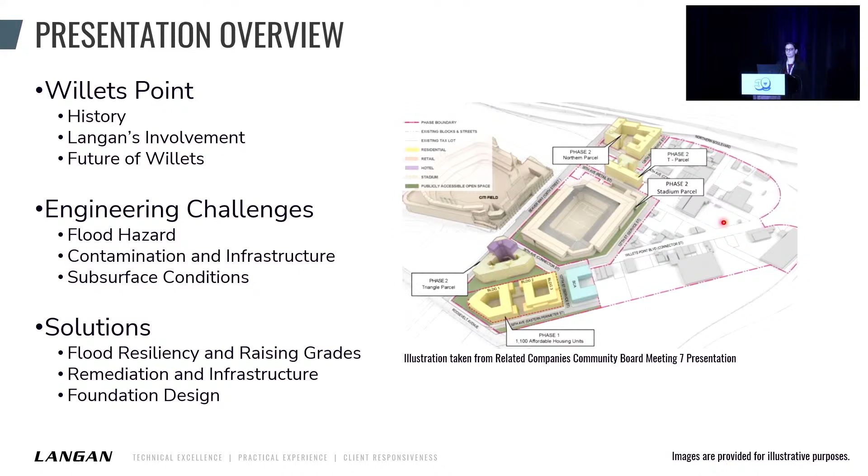It's 61 acres of land. To our north, we have LaGuardia Airport. To our south, we have Arthur Ashe and the Louis Armstrong Stadiums for tennis fans—that's where the US Open is held. To the west, we have Citi Field, home to the New York Mets. Congrats to all the Dodgers fans for your win, but go Yankees.

We also have some sensitive transportation infrastructure near us. We have a DOT elevated highway to our north, a New York City Transit elevated line to our south, as well as a DOT bridge to our south.

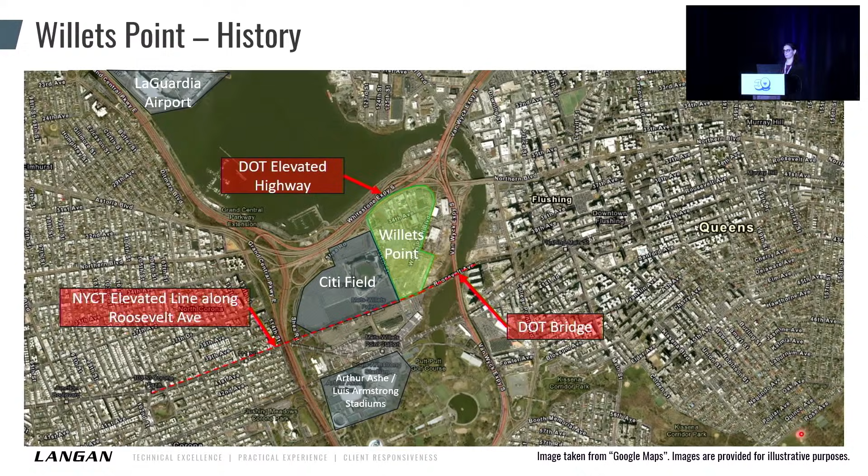So the history of Willets is very important. In the 1900s, the New York City area was using coal to heat their homes and for industrial purposes, and they were taking that ash and just dumping it at Willets. Then in the 1930s, the area became a little more urbanized, and they decided not to put residential housing there because of the coal ash. Instead, they put in some auto body shops, some filling stations, and called it at that.

So it was like that until very recently—you would just walk by and see all these auto body shops. In the late 2000s, early 2010s, there was an initiative by the governor and mayor to give Willets a facelift. And so that's when we came on board.

So we came on board in the 2010s, but it wasn't until a decade later that we got boots on the ground. I did the initial geotech investigation in 2019. That's because this is 61 acres of pretty contaminated land, and I'll talk to you about the other challenges as well. We had to get developers, contractors, community boards, and government officials—a whole bunch of people—on board for us to even get to the site.

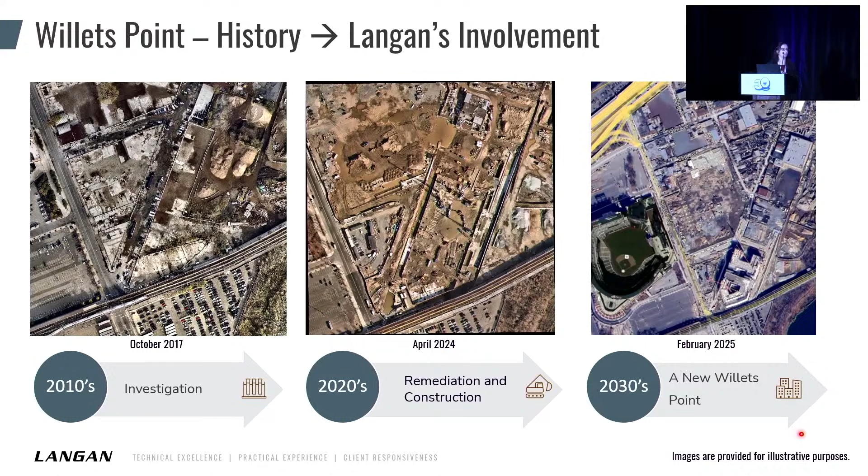So in the 2020s, we did remedial work and started construction, and we're hoping for the next decade to show a new Willets in phases 1 and 2, with a start to phase 3.

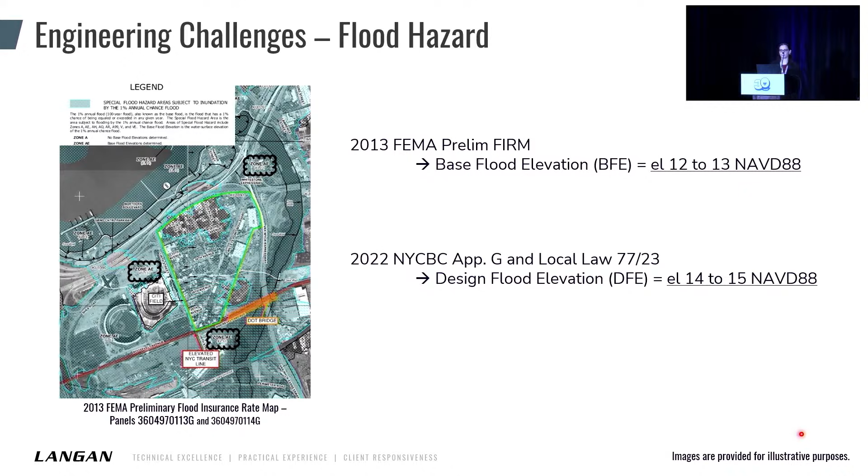So the challenges. This is 61 acres of land that's within a flood zone. If you go to the FEMA maps and find our site, it's telling us we have to go to elevation 12 to 13 for flood resiliency. That's already above existing grades. We also have to look at the New York City Building Code, which requires an additional 2 feet of freeboard. So that's 2 more feet of fill needed for flood resiliency. That's 61 acres of land that has to go up.

Next, obviously, all the contamination. There wasn't much oversight in the 30s about what you could do, so these auto body shops were just dumping oil, gas, tanks, car parts, bowling balls, you name it, below the ground. We had to remediate all that soil. Also, the infrastructure wasn't built for residential use. It's not going to meet the demand we want for our future vision of Willets, and whatever is there is outdated, very inadequate, and decaying.

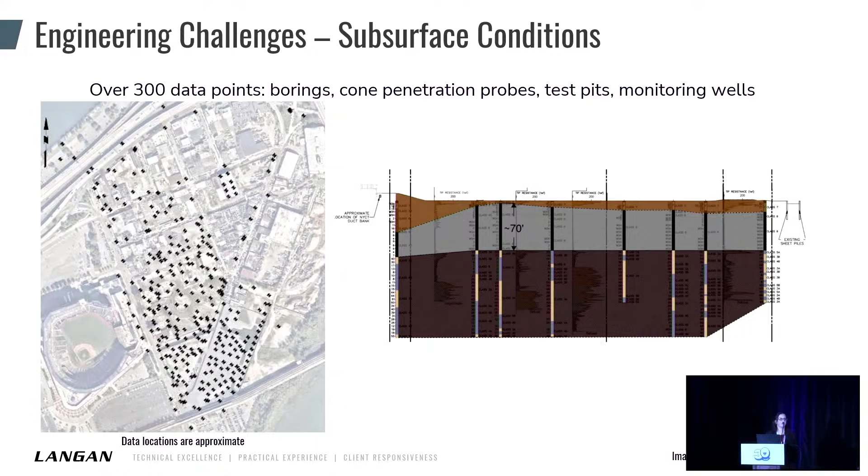And finally, the geotech aspect. We have 300 data points in this area, and we can see variation from the north to the south of the site. The southern half is really where the bulk of our work is at the moment, and it's the biggest concern because there's 60 to 80 feet of underconsolidated, super soft, soup-like clay, as well as silt and peat. So who would want to develop on this kind of ground?

If you walked around the site a few years ago, you could see a pile-supported footing and all the ground around it settling. If we did a test pit—this is a picture of mine from 2019—the settlement of the roads and sidewalks was handled by just going in and putting more asphalt, and that's more weight, so that's more settlement. Then they'd come back with more weight and more settlement—a never-ending loop.

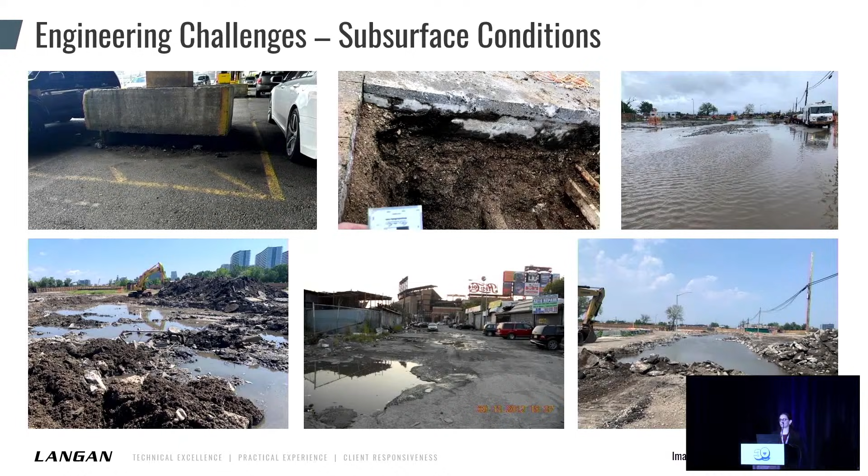And the site itself was a flood zone without flood. During a normal rainstorm event, there were just puddles and inches of rain on the site because the clay wasn't allowing it to drain. There was no infrastructure, no stormwater management, and it was just a mess at the site.

So the solutions. First and foremost, we have to make sure the site is flood resilient for the future, so we have to bring the grades up a minimum of 2 to 9 feet, and that's on top of all this clay that I was mentioning.

We also have to worry about all the edge conditions because we're making this new neighborhood, but we still have a whole other part of Flushing around us. So while we're putting our own streets, infrastructure, buildings, and neighborhood, we have to make sure everyone can access it. Even though we're putting in roads, we have to make sure our roads attach to the roads that exist. In some cases, that means we have to add 10 to 16 feet of fill just to be able to access the site.

So while contamination and infrastructure seem like environmental and civil issues, they become a geotechnical problem when you actually have to go in and do the work. We installed and designed support of excavation systems for all this work, which could go up to depths of 20 feet below grade, in high groundwater and very soft soils. So you see the challenge in that.

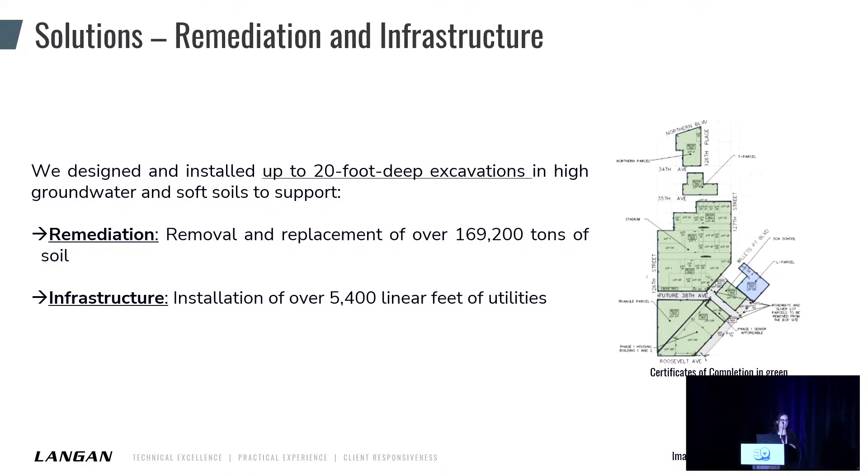So when we actually went in and did this, we were able to remediate and replace 169,200 tons of contaminated soil, and our civil team was able to help with the installation of 5,400 linear feet of utilities. And this is only to date, for phases 1 and 2. Phase 3 has not begun, so this number is only going to grow.

And here is what I've spent a lot of my career on, the foundation design at Willets. So we had a kind of checklist of everything that we wanted to hit while we were picking our solution for a foundation system.

We really, really wanted to do soil improvement. We wanted to be innovative, and it just didn't work for our schedule. It didn't work with the agencies. The cost was not where we wanted it to be. We went granular, did a few iterations, and it still wasn't where we wanted it to be.

So we had to look at piles because obviously you're not putting shallow foundations on this soil. Piles to rock would have been ideal, but rock is over 300 feet down, so you don't want 61 acres on stilts. Next, we looked at driven piles.

The cost of steel has gone up in recent years, so that was not so great. In terms of schedule, driven piles are typically faster to install, but we have to go really deep to hit bearing material, so that means you have to splice the piles, and that adds time, so it's not helping our schedule. And for agencies, I don't know how it is out west, but in New York City, they're pretty strict about vibration limits. So we couldn't drive any piles near the DOT to the north and south, and New York City Transit. It was a mess, so we just wanted to avoid that.

And then we were like, okay, drilled piles, let's do it. Concrete's a little bit cheaper, we'll make it work. So we looked at CFA because it's a really good option, but it's gonna create spoils, and we don't want to do any more remedial work than we have to. Hopefully those spoils weren't contaminated, but you still had to do in situ testing, and it was gonna add time to the schedule.

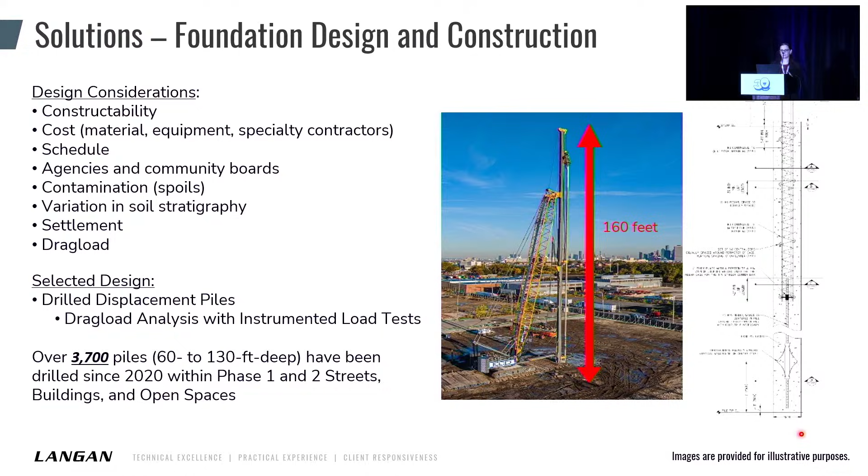So to date, we have installed 3,700 piles within phases 1 and 2, and this encompasses everything I mentioned. For the buildings, pretty easy - pile caps, piles. Everything else that has to be raised up to flood elevation was pile supported. So we went in, remediated, put our piles, put a platform, and on top of this platform we put clean fill. Within the clean fill is the utilities - I'll highlight some that we had to install. Then we went up to design flood elevation, and then we put roadways, landscape, hardscape, made it beautiful, right?

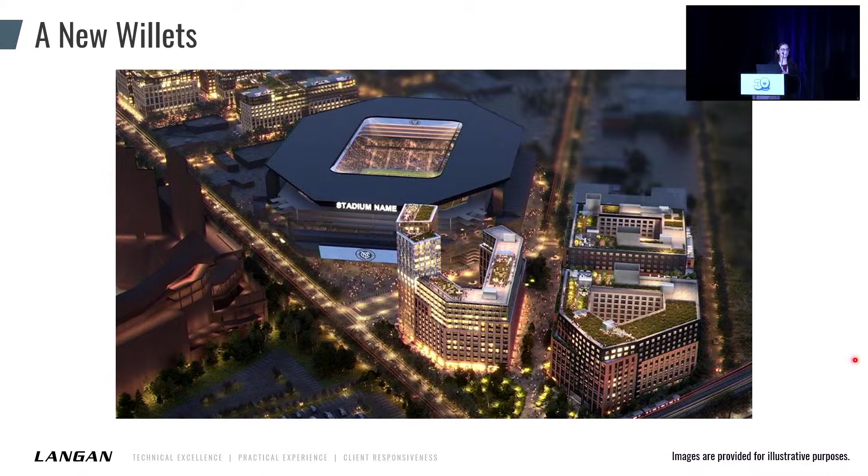So this is what we envision it to be by the 2030s. I've been on this project since 2019, since the second week I started at Langan, and it was a challenge. It still is a challenge, but it's really exciting, and I can't wait to see just what the future holds at Willets. Thanks.

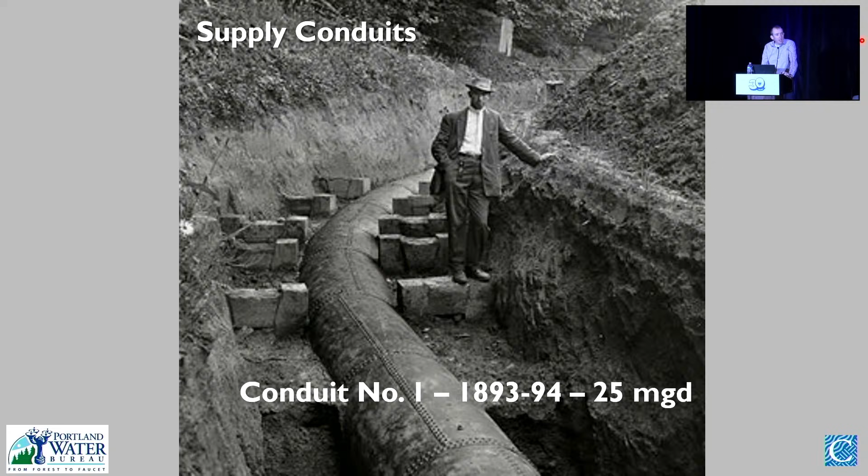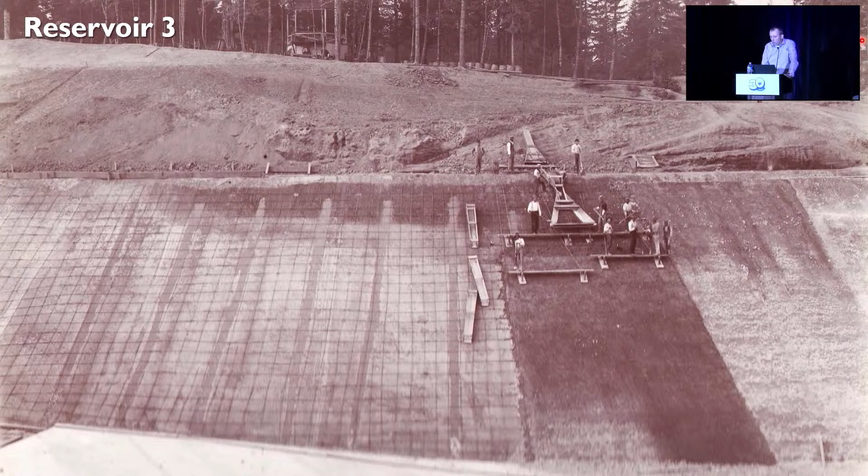Now here we have a photo of Reservoir 3 prior to first filling, looking here from the north towards Dam 3. You can see on the right of that photo there's a feature that wasn't in the original design drawings. As we dug back into the documentation for the project a bit, we found that they had recorded some significant cracking in the concrete liner shortly after it was first constructed there.

They had encountered some fairly rocky material when they excavated through that portion of the hillside, and also quite a bit of water borne on that rocky debris. They interpreted this to be a local stability issue. They put back this concrete buttress and also dug a little drainage tunnel through the hillside, patched everything back up, and then were ready to fill the reservoirs.

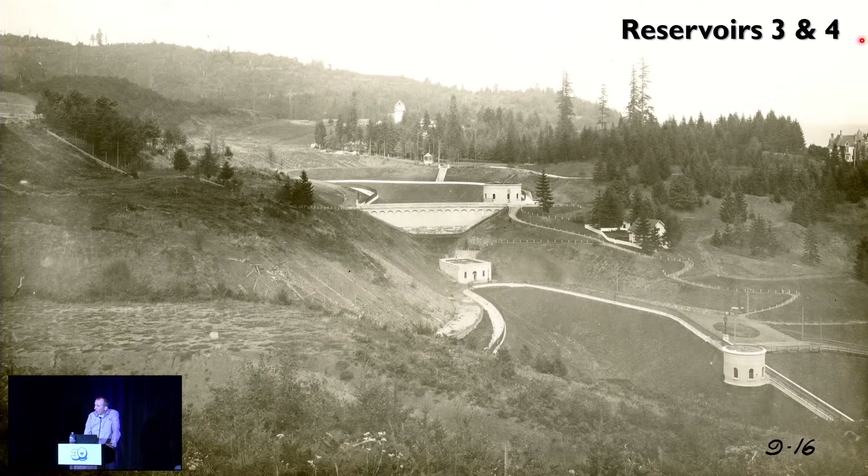So this is a photograph of what that would have looked like around the time of first filling. We're looking from the south now, so Reservoir 3 is the upper reservoir in the distant part of the photo, and Reservoir 4 is down near the bottom of the photo.

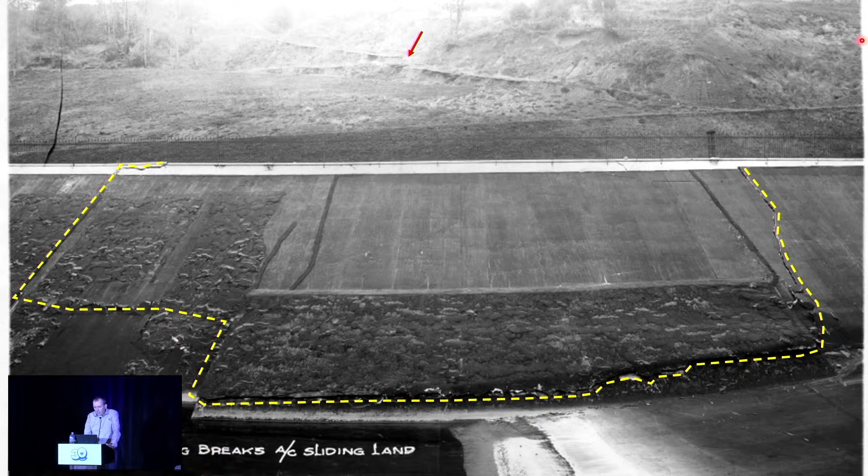Now the city engineers realized they had a slope stability issue, but they were a bit puzzled because they were anticipating more of a circular type of failure surface. So they were scouring the hillside in the roadway up above, looking for ground cracks to show where the headscarp was, and they couldn't find any.

They were puzzled for a couple of weeks until they got a communication from the cable car company, which had tracks about 800 feet up the hill, saying, hey, our tracks are coming out of alignment, do you know anything about this? And then they realized they had a much larger issue on their hands.

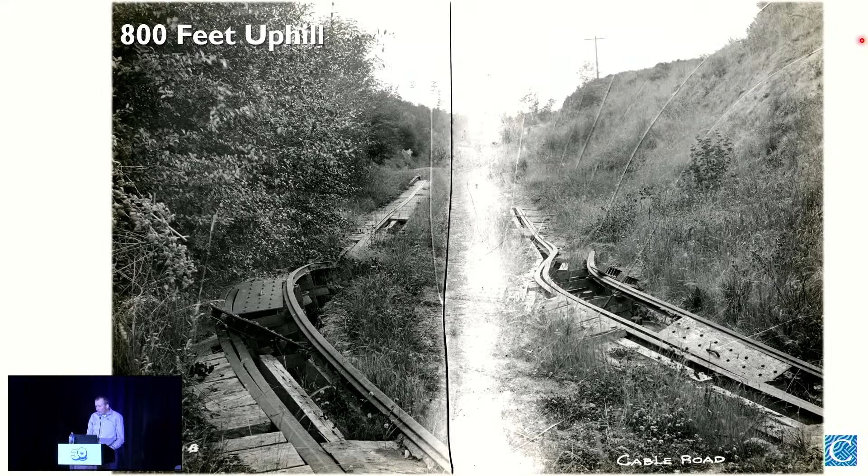That kicked off a round of much more detailed investigations and characterizations of the slide. We're fortunate because the city engineer recorded a lot of detail from these investigations in a paper presented to the American Society of Civil Engineers back in 1904. This was like a 50-page paper, so we have a tremendous amount of detail on what they were finding. I'm going to walk you through a little of their initial investigations and borrow a few images from their paper.

So we didn't have any measurements of movement downhole, but they were at least able to determine the depth of the slide movement. What they found is that the slide was about 1,700 feet long, about 1,100 feet wide at the base, 250 to 300 feet in elevation difference from the toe to the head, and anywhere from 60 to 130 feet deep.

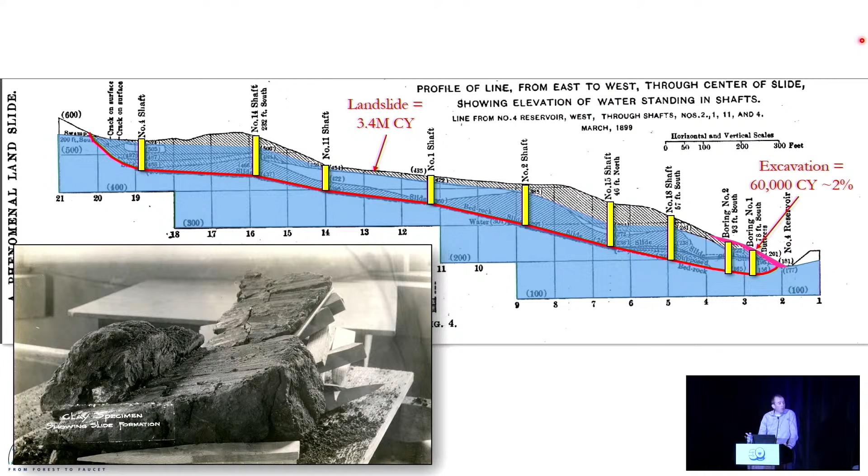So what tools did they have at their disposal back then? Not very many. They can't remove that clay, and they don't have a lot of structural options to stabilize this, but they could deal with the water. So they came up with the concept of constructing tunnels to reduce that rate of movement, which was about 15 inches per year at that point, placing tunnels along the shear plane to gravity drain that water from the top of the slide out through the toe.

Between 1900 and 1906, they put in over a mile of these tunnels, and they were actually very successful at reducing the rates of movement, with that rate being a little over 1/8 of an inch a year by the time we were getting towards construction of this project.

To put a little more detail on those rates, we don't really know how fast that slide was moving at the time it initially reaccelerated. But by the time they started to investigate over the next couple of years, it was moving about 15 inches a year. They started dewatering for these shafts, and it knocked that down by 90% — a big eye-opener to them.

They stopped dewatering, that rate started to rebound, and then they started putting in these tunnels over a couple of phases, which brought the rate down to about half an inch per year. Over time, that rate gradually decreased as the drainage became more effective, and we start to see a change in the weight balance between the head and toe of the slide as it keeps moving.

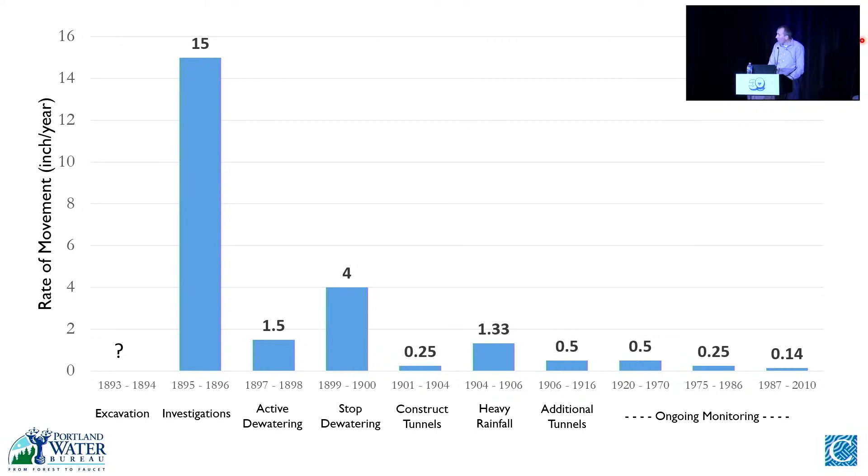Really, this was remarkable mitigation for them at the time, to be able to change the rates like that. But 1/8 of an inch a year still adds up over time, so the Water Bureau, over the following decades, still had a lot of damage to their concrete and other facilities to continue addressing. They eventually lined the reservoirs with a Hypalon liner to try to reduce how often they had to touch up the concrete.

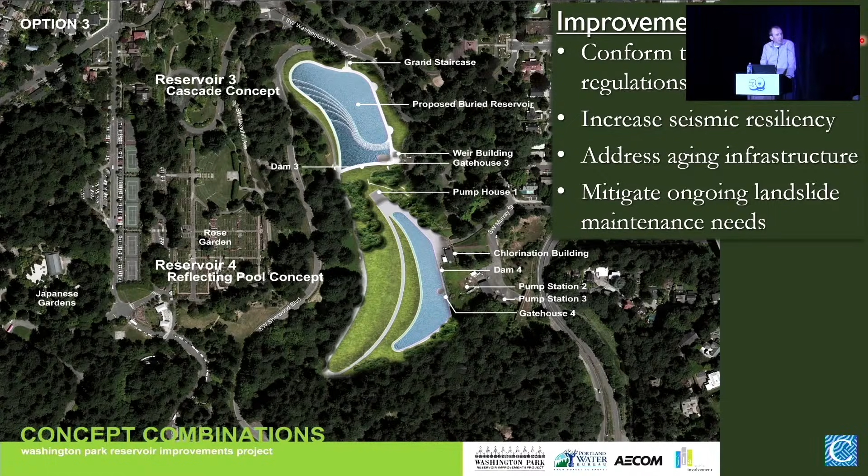But eventually they were getting to a point where they knew they had aging infrastructure they had to address. As they kept going, they also realized they had more seismic resiliency issues that needed addressing, and eventually they would have to respond to federal requirements to cover their drinking water supply. So that's where this project began, in order to improve the existing reservoirs at the Washington Park area.

And all of this had to happen within the footprint of this active landslide. So how do we do this without repeating the same mistake that they did originally by cutting indiscriminately into the toe of a slide?

Well, we had some things working in our favor this time as we approached the landslide design, and one is we have a tremendous amount of monitoring data. So we have the survey data that goes back to the 1800s that tells us how that slide was behaving over time and the effectiveness of that drainage.

But we also have slope inclinometer data. It goes back to the 80s, and not just at the site, but all the way up the hill as well throughout that landslide. And you can see from this plot I'm showing you here for one of the SIs that behavior has been remarkably consistent over time.

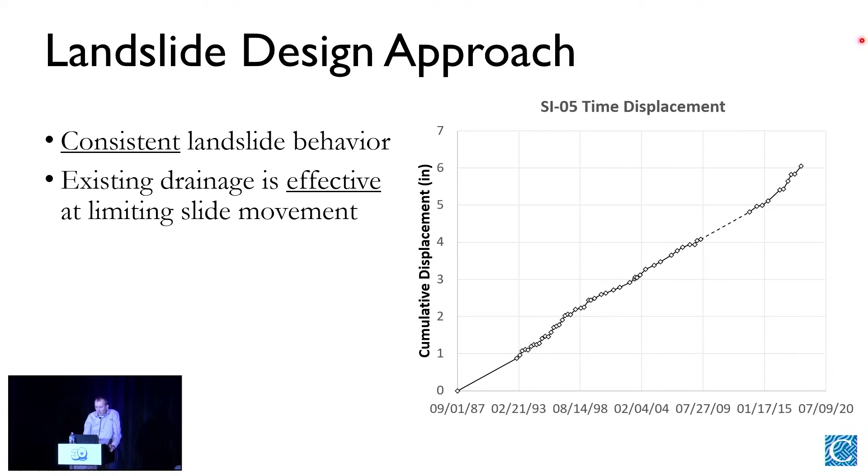So that allows us to accommodate this movement rather than trying to stabilize the slide. And in order to do that, we can isolate the new reservoir from the landslide. So the way that we did that for this project was by designing a compressible inclusion to place between the landslide and the reservoir.

This compressible inclusion consists of a zone of engineered expanded polystyrene, or EPS, that gets placed between the slide and the tank. And as that slide moves, it's going to crush that EPS and impart a much smaller and more predictable load on the tank. And then we also have an MSE fill that goes in between the slide and the reservoir for a couple of reasons.

One is we needed a place to build some of those visual features, but it also helps put some weight on the toe to counteract the removal of water. Now that we no longer have an open reservoir there, we've actually taken some weight off of the toe of the slide by removing that water.

And then there's a little concrete toe block you'll notice there. The purpose of that is to get us up a little bit to start that MSE wall, so we don't have to cut back so much into the toe in order to get our base width for the MSE wall.

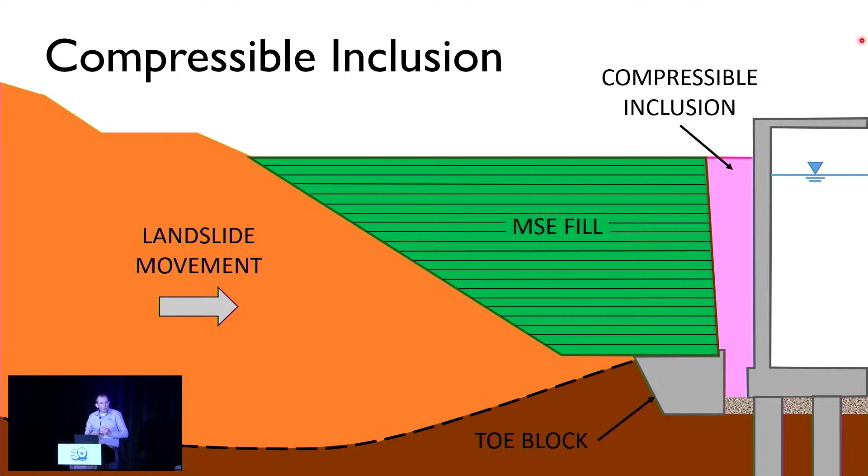So this is a picture of what that looks like. Engineered EPS is going in just as blocks that are trimmed to be flush with the MSE wall on your left and the tank on your right.

And all of this, of course, fits within a much larger project that included shoring that allowed us to offset the reservoir from the existing toe of the slide a bit. We have a lot of drilled shaft foundations that were supporting that new tank, visual feature elements, and park elements on top. But really the key part of that landslide design was the compressible inclusion.

So let's talk a little bit about how the landslide responded during construction. This was a project that lent itself very well to the observational method, and we used some specific techniques to try to manage those risks of having to make some excavation to the toe during construction.

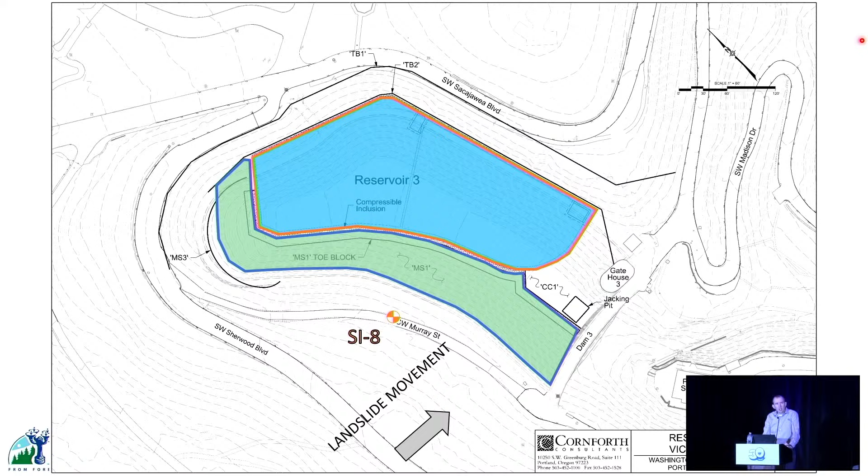So we'll look today just at a small section here of the MSE wall construction. That's the green area I've shaded there, and we're going to look at a particular inclinometer, SI8 here. This is an inclinometer that was installed with an IPI string, so we were getting very frequent readings of how the landslide was responding to the changes we were making at the toe.

So I'm going to show you a series of photographs here on the left that illustrate the progression of construction, and then on the right we'll look at how the slide is responding to that using that inclinometer.

So we have kind of a base rate of movement going in, and the reservoir is dewatered at this time, and so that rate's actually just a little bit higher than the pre-existing rate because we've taken a little bit of weight off the toe there.

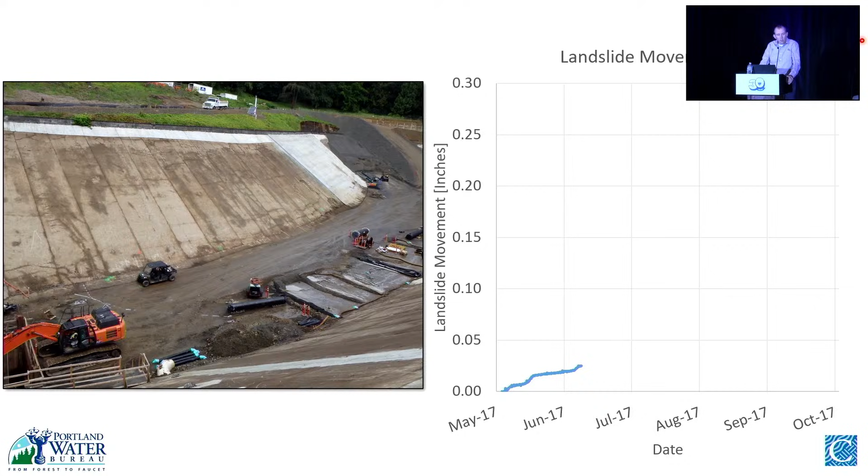And the first thing the contractor was allowed to do was to get in, and they could strip the concrete liner and excavate for that toe block over just 50 feet of the reservoir. So we're using these closely sequenced excavation methods with a required backfill before they can progress to a new segment, in order to manage how much weight we're taking off the toe of the slide at any given time.

So this wasn't very much. This was 6 inches of concrete liner, 100 cubic yards of material at the toe for a 3.4 million cubic yard landslide. But do you think it felt that? It did.

At least the lower block of the slide did respond, because we're changing the stress conditions at the toe. We saw an immediate response where that lower block accelerated, and then the contractor had to put back concrete in that hole within 24 hours, and you see it immediately starting to slow back down. We progressed with that sequence in 50-foot segments, moving from south to north, and with each segment we saw a similar response: initial acceleration, then deceleration as they backfilled. This was telling us that the slide is responding in a manner consistent with our geologic model.

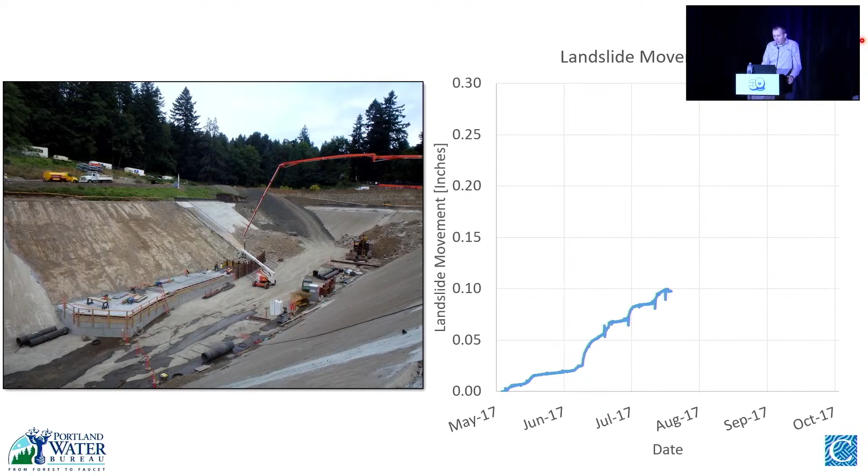After we got that toe block complete, we needed to make a bit of a cut into the hill to get that MSE wall keyed in. So there's a little bit more excavation, probably 400 to 500 cubic yards. We put some of that material on the slope to the north of it, so it's not off the toe entirely, just in a different place. But as you'd expect, more weight changing means more response.

We're zoomed in on this, with a pretty tight scale on the vertical axis, looking at just a quarter inch of movement or so, but it's definitely responding. Over time we kept building the MSE wall back as we expanded that excavation footprint, and we were kind of chasing ourselves for a while because you had to get a fair length of wall exposed to build up some height. That movement continued to progress for a couple of months as we caught up with the weight there.

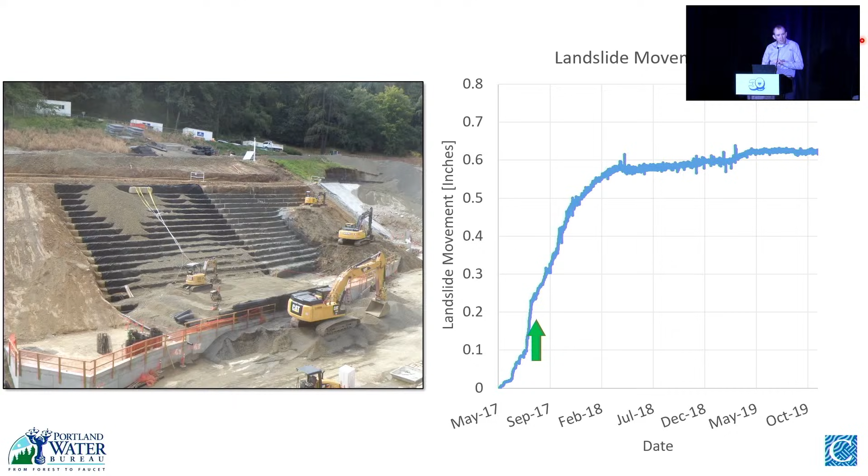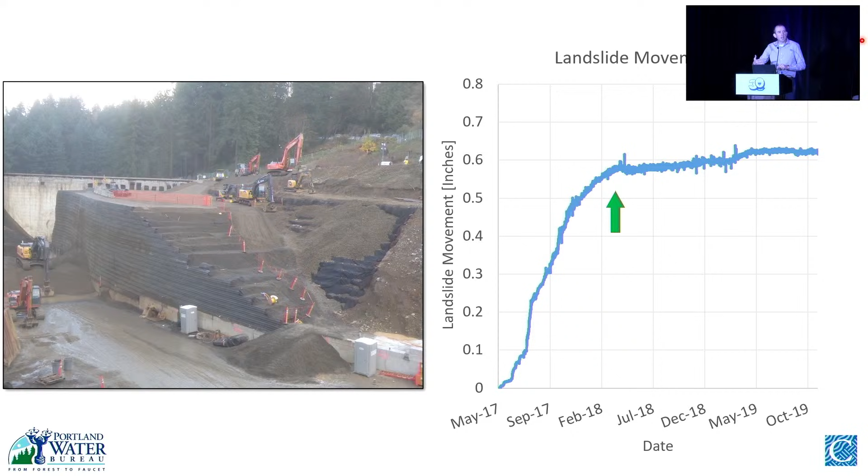I'll zoom out this plot of slide movement rates now, and the green arrow shows where we're at in that sequence, and we'll walk through the rest of the MSE wall construction. You can see we're starting to get about halfway up over a limited length. Now we've got that about halfway up over most of the landslide toe in this area, and we can see the rate's just starting to slow a bit. Finally we get that MSE up to design height over about two-thirds of its length, and we finally caught up with the amount of weight we'd removed, and that slide is starting to stabilize.

While I'm not going to get into a lot of detail on how we were using this information for construction decisions today, we did have a framework in which we were monitoring each of these events as it went, assessing them within a risk framework with different tolerable thresholds in order to make decisions on how construction could progress.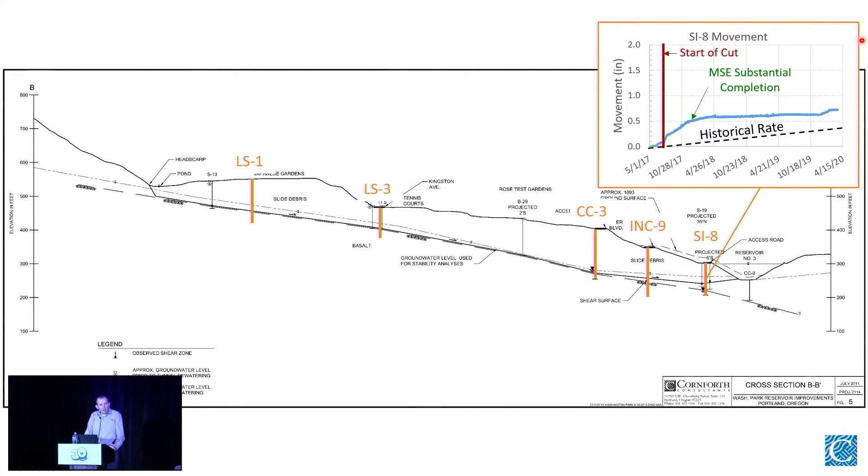If you look at the next instrument up the hill, you can see we had a response that's very similar in overall trends, with initial acceleration followed by deceleration, but there was a delay in when that occurred and the changes were more gradual. That continued to hold as you moved further up the hill, where we had an increasing delay in movements, and in general the changes were more subtle as you went up the hill.

This is consistent with a lot of behavior we'd see for an extensional translational landslide, where the slide is extending from the toe as that support is removed. At the start of construction, we would have had varying degrees of internal tension cracks existing within that slide, and you end up seeing different blocks that tend to move within the slide. So you make that cut at the toe, and the lower block responds right away. Then in the process of doing that, it reduces the stability on the block uphill from there, creating what you might call this train car effect, where it moves in these blocks progressing up the hill.

And because we're doing this in a way that's removing support unevenly at the bottom, we have different levels of stress redistribution happening. It tends to diffuse the suddenness of that response as you move up the hill.

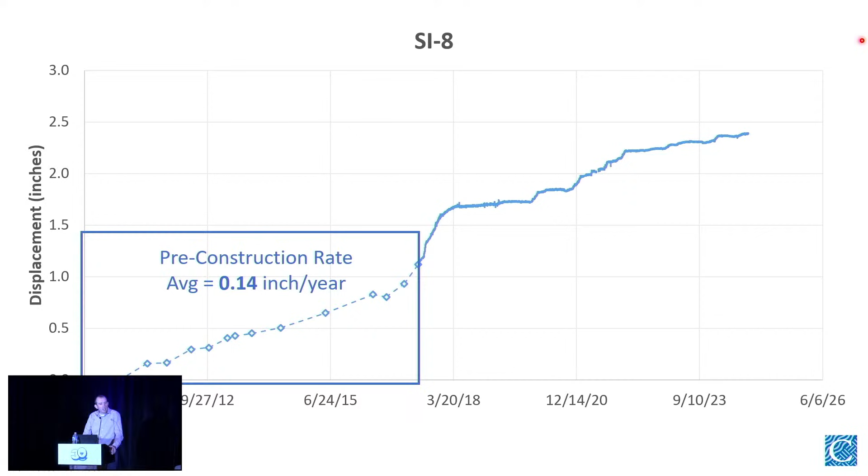I also wanted to show you a bit about what it's been doing since construction. So we talked about how prior to construction we were looking at a little over 1/8 of an inch a year of movement. During construction we peaked out at about 0.86 inches per year, and that was a total of just under 2 inches of movement over about 4.5 years. So we saw about 14 years worth of movement in 4.5 years. We consider that to be certainly an acceleration, but a manageable change in rate.

And since that time, we've been averaging just under 1/10 of an inch a year. Now, I don't know if it's going to remain below that pre-construction average indefinitely. We've increased the factor of safety only very slightly over the pre-existing conditions, and that really wasn't the intent of design to reduce the rates. It was really to accommodate the rates. So what's encouraging to us is that we're seeing rates remaining within that range that we anticipated during design.

So those are the thoughts I wanted to leave you with today. We were very fortunate to have the level of monitoring data that we did for this site, and we were really able to leverage that in order to design for this slide in a way that we were able to accommodate movements and manage construction risks associated with this approach, rather than trying to stabilize it. So again, data is always our friend as engineers, and the more we can leverage that, the better. So far, the post-construction data is indicating that landslide movements are within the design range.

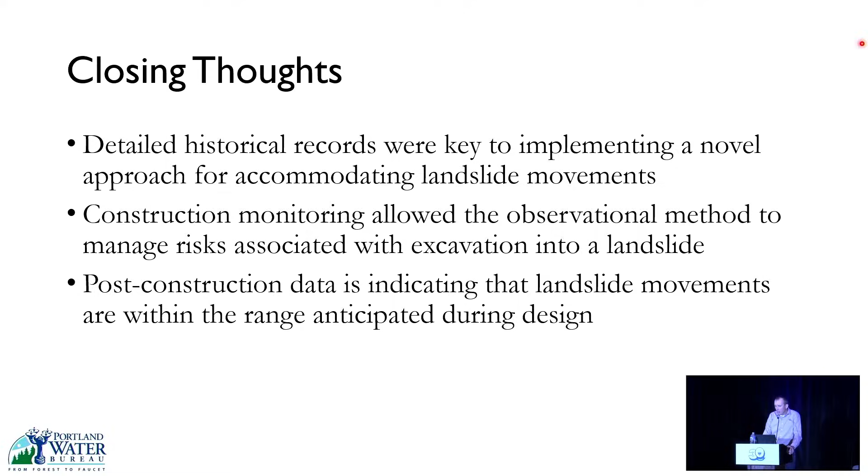But we're happy that we have the seismically resilient water supply now, and all indications are that the landslide mitigation system will be able to maintain this for a long time to come. So thank you. I understand that we're going to save questions for the end, so I'll stick around after this if anyone wants to talk with me. Thanks.

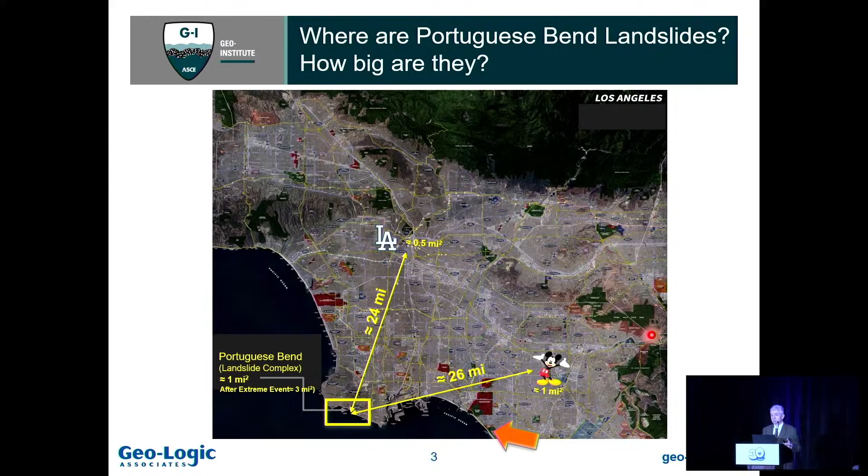You see the orange arrow at the bottom of this slide. This is approximately where a beach close to my house is, so I'll show you how it looks. So this is how it looks. I go to the beach 3 times a week. I never can stop thinking about this landslide because this is how it looks, and let me annotate it a little bit. So this is Portuguese Bend, this is the original, this is the best known.

This is about 1 mile, and this, what we now call Altamira complex, which started moving in October 2023, is 3 square miles. What I've also shown here is indicated as VVG, which is Valley View Graben.

This is what our geologists think: water is coming in from a higher elevation and then ends up at the toe. Notice also how this is relatively flat. This is not kind of steep slopes. They are relatively flat slopes, but they move, and they do move pretty well.

A few highlights about this landslide. It used to be the largest landslide in the US. It allegedly started moving in 1956.

Portuguese Bend landslide failure plane was, at least everybody or most people thought, 150 feet deep, moved about 12 feet a year or half an inch a day. So relatively fast. And then it started moving seriously.

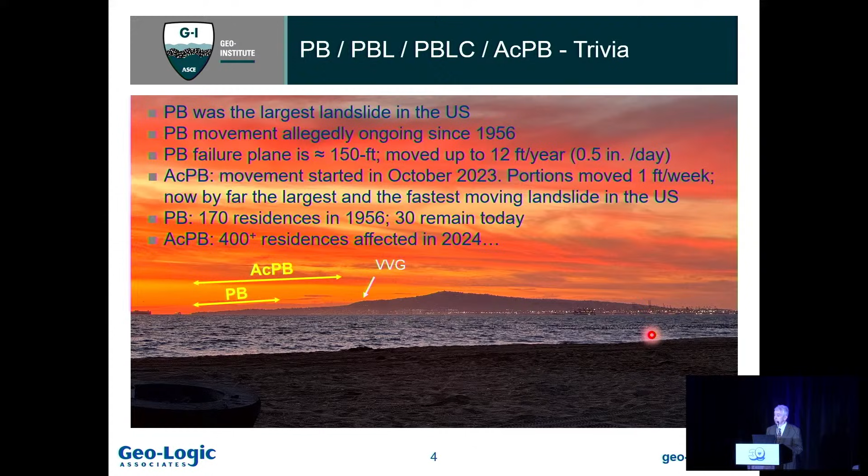Now, this is how residences within the Portuguese Bend landslide, those 30 that remained, look like. You can see people kept fixing. They refused to move, and they kept lifting them up and up and up. Those of you who took a field tour last Saturday, you've seen this, what we call a ski jump, which goes up and down. Well, this is that ski jump, just up the hill, which is now not accessible for various reasons.

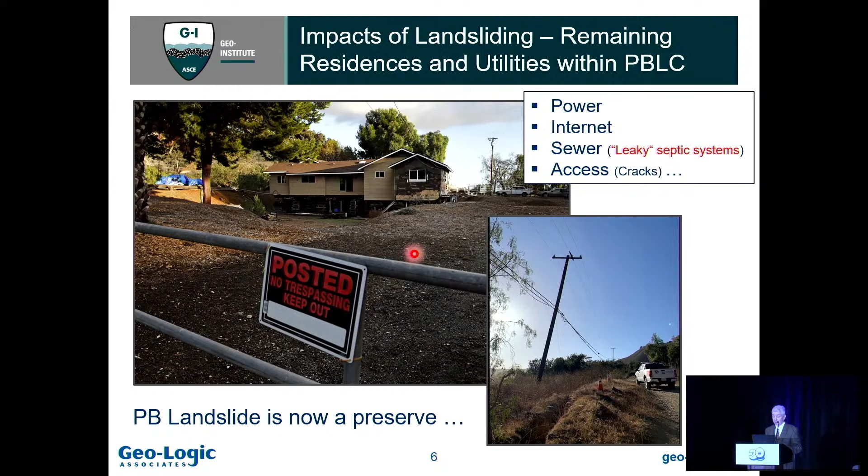It is now a preserve, so there's no new development. It's a nice hiking trail, unfortunately not accessible, but hopefully one day it will be.

So in summary, this is what we found when we joined this project: 70 years of investigation since 1956, and 476 geology and geotechnical reports. I had a staff engineer look at all of them with one question - find me one that does not end with 'we need more data.' He actually did find one.

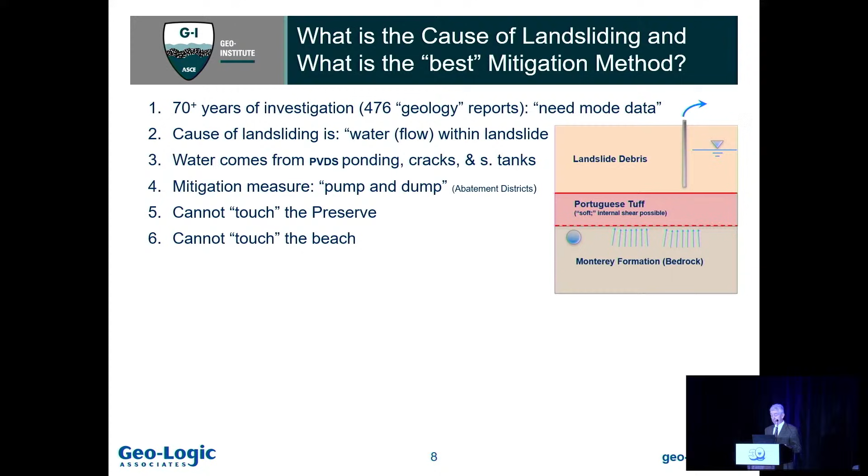So then we said there is enough data - 476 reports. I don't recall when I had this much information in my career. The predominant cause of the landslide is likely artesian pressure at the toe. The most likely source of this artesian pressure is the Valley View graben, which I showed you on one of the first slides - something big in the middle of the hill.

Mitigation measures release the artesian pressure, but it's absolutely paramount that you also do source control, because you may release it, but the next season it will build up again, and your vertical wells may get sheared off.

We also said we can avoid disrupting the preserve and the bugs and bunnies and whatever they eat, and we can do that by directional drilling, but we will need access to the beach.

In this business, opinions differ, and over 70 years people have developed certain ways of thinking. Some convincing is needed - what I showed you on the previous slide can be a technical proposal, but some work with the public and others is also needed.

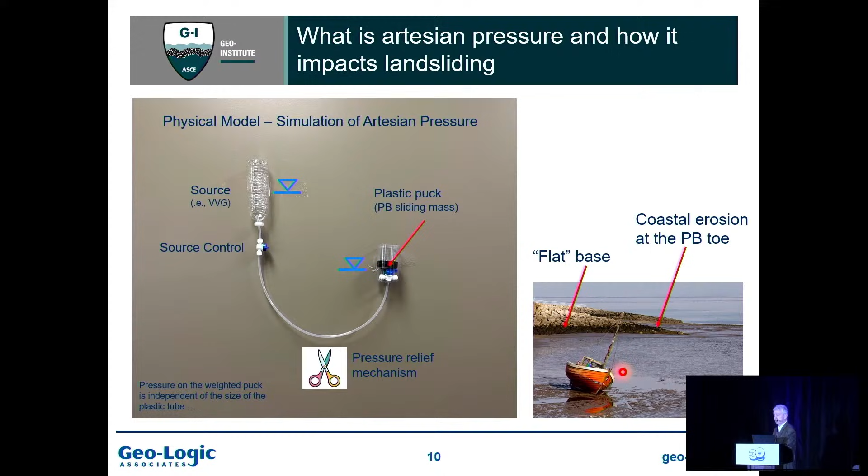With that, you can develop a conceptual model, which we did, and this is a conceptual model just for this part of this large landslide complex called Portuguese Bend. So here's the conceptual remedial measures in conceptual form. Within the red line, there is the landslide.

So what I would do first, I would cut the source control. If I have a magic wand, I would cut a deep trench so water cannot come in and cannot feed the artesian pressure at the toe, and then I could drill and release it, and hopefully we are done. But that is not feasible.

So the other way to do it is to install a series of horizontal or directionally drilled wells here at the toe, access permitting, and then hopefully intercept as much as you can, and then work at the source, which is above, unfortunately in another city, with a few agencies involved. Those of you who practice in Southern California know how easy or difficult it is to put all of this together. But in concept, that's it.

And once you control the source, then you can come at the toe and poke a few holes by directional drilling. We call them hydroaugers. It's the same technology used in fracking—just no fracking, but a mistake I made once was mentioning fracking, and that generated two weeks of discussion. These can be up to 1,400 feet long.

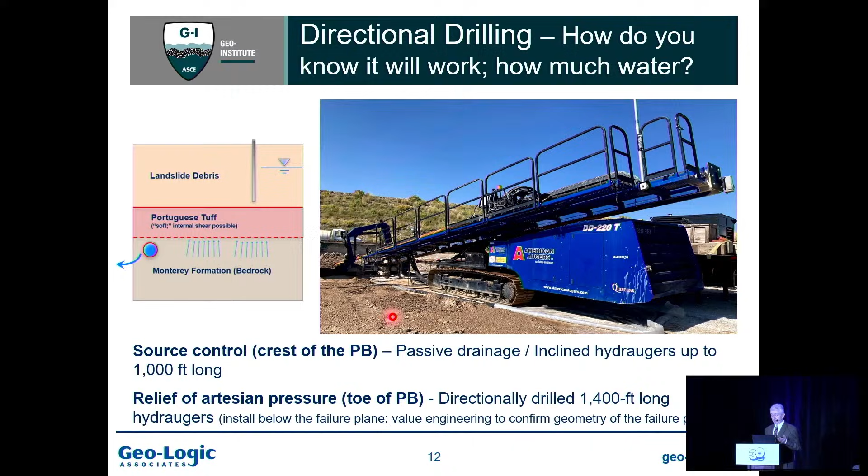Now, some convincing is needed here, because people don't see much of this, especially in Southern California. Saying yes, we did it at the FRB landfill, and we did it at Sunshine Canyon landfill, isn't good enough. So you need to do some modeling. People like modeling—whatever the computer program spits out, that must be good.

Mr. Withoff, who is here in the audience, developed a square mile finite element model, steady state seepage, with artesian pressure at the base. We also developed, as I'll show you later, limit equilibrium models of the same area, with artesian pressure included and hydroaugers at the top of the landslide included.

We did a few, following the proper process: develop the model, back analysis, model calibration, model validation. We knew how much it moves, so we could do pretty well on validation and calibration. And then we did forward analysis with and without drains.

I will show you results here only for this, what's called the 1 and 1 for two blocks—basically the southeast part of the landslide—because the proper way to do this is not to experiment on a scale of 1 square mile, but to do a pilot program, value engineering, proof of concept, and so on, which comes with this type of modeling.

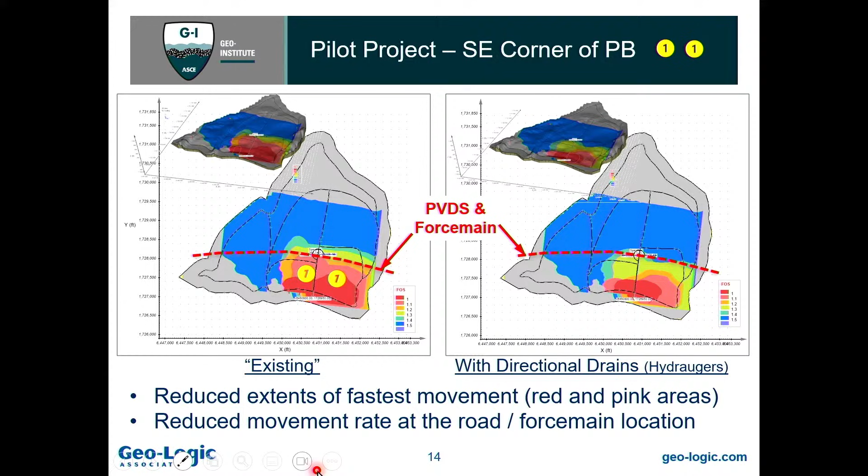Okay, so after all of this, you go into remedial design. It's a pilot project, and we also wanted to use value engineering because there are issues—even though there are 476 reports and about 1,500 boreholes, the geometry of the failure plane is not well known.

It's still a guess. With this directional drilling, you want to go below the Portuguese tuff, and for that, what you do is poke a few holes and instrument those holes, so you have a pretty good idea about the geometry, and then you can go below that and install directionally drilled hydroaugers. So what I'm showing here is one piece of information we had—in red is basically the basal failure plane as we understood it before we started the pilot program.

In blue is groundwater within colluvium, within landslide debris above the Portuguese tuff. I'm not showing artesian pressure here - that was a little bit more difficult to guess, but I'll show you some information later. And I will show you cross sections.

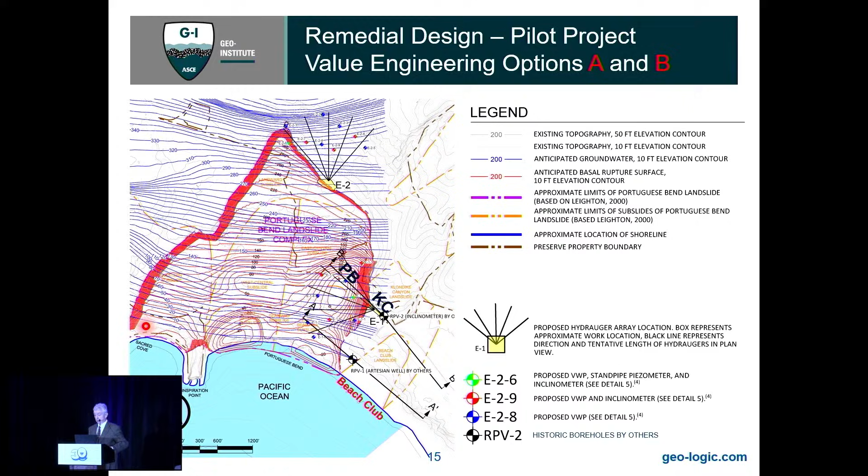This is section AA, which we believed was a much better candidate than BB, but we had to have both. Actually, we had 3 sections because up to the last moment we did not know if we would get access to the beach. There was an intermediate one, also restricted access, and one along Palos Verdes Drive South at the top of BB - you'll see why the one at the beach is the best.

So here's a cross section we call Beach Club, and here you have the Portuguese tuff, relatively well defined and established. It's not that deep or thick, so it's easy to do a pilot program because you need relatively shallow boreholes. Most importantly, you don't have a failure surface, which I show here in magenta, from the neighboring Klondike Canyon landslide messing up or intersecting - at least that's what our geologists thought.

That is not true on the other section, which is higher up, so you have a more complex geometry. There's a potential, shown here with question marks, that those 2 failure planes cross each other - it wasn't known at the time we did this. If the failure plane of the neighboring landslide crosses the failure plane of the landslide we're trying to mitigate, it can impact those hydroaugers. Even though those 2 landslides had displacements measured, they moved more or less in sync, and at the beach there was basically no differential displacement.

There was some displacement above. Now, this is the situation where we did attempt to demonstrate with numerical modeling - you can do it relatively easily, like an L-pile analysis, or finite element - but that didn't fly. People wanted more. So that is a situation when you actually need to involve rocket science to keep the project moving. I'll show you in the next slide how this looks.

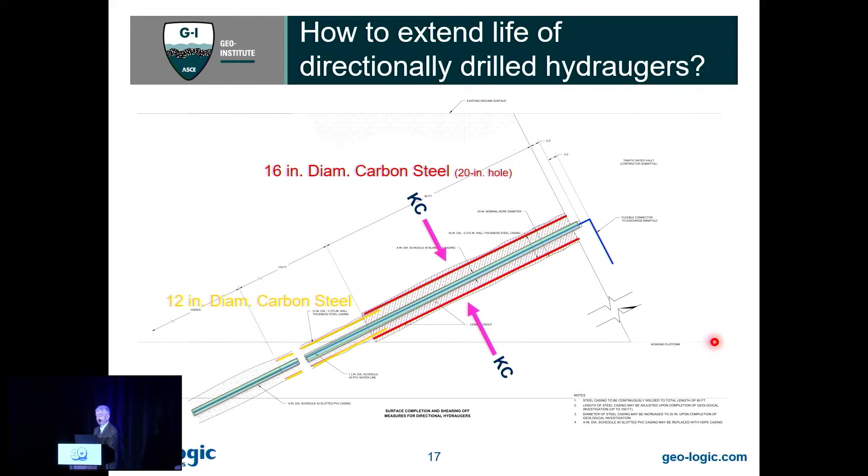As I mentioned, this was all difficult to explain to those who don't do this for a living, who don't have a geotechnical background or background in numerical modeling. So we got a rocket scientist involved, sort of. And here's his famous quote: 'One good test is worth 1,000 expert opinions.' We had, I think at one point, 26 experts commenting. So, okay, let's design an experiment.

So here's the experiment - the good test, as he calls it. Drill 2 pilot holes close to each other. Case one of those holes with recycled carbon steel - not as large or as thick as our design, but something everybody agrees on. I think these were 7-inch holes. Then one is cased, one is not cased. Then penetrate well below the Portuguese tuff into the bedrock.

And you can do that with sonic drilling - you don't need to change the drilling technique when you switch from colluvium into Portuguese tuff and then into bedrock. So with sonic drilling, let's instrument this pretty well, so we monitor displacements with shape arrays - near real-time monitoring - and monitor pore water pressure below and above the Portuguese tuff, in profile, with vibrating wire piezometers. Basically what matters is the differential. We thought we'd get pore water pressure above and below, but what matters is the differential. So we did that, and let me show you how it looked.

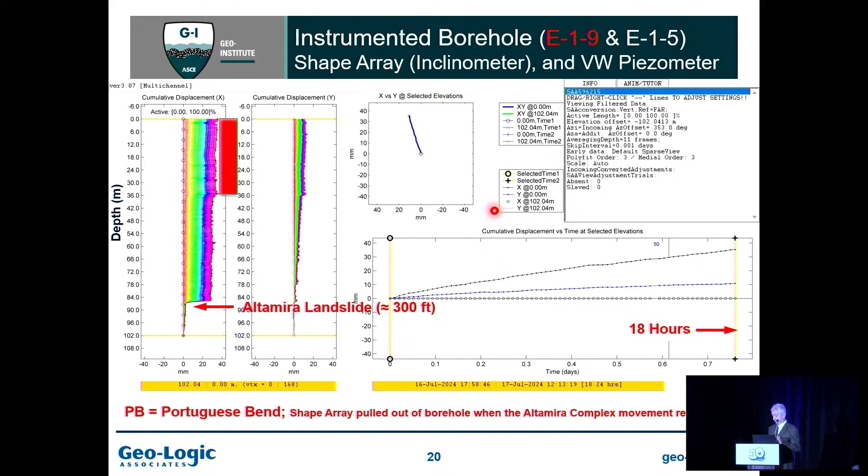Beautiful, isn't it? And there's even movement in the perpendicular direction, and discussion on why each of those benchmarks shows a little bit different rate of movement and a little bit different direction is still going on. So this is this Portuguese Bend.

Okay, and now, as you guess, this bottom of the borehole has something to do with an extreme event. This extreme event started in November 2023 and accelerated April 2024. We first saw it in boreholes. We stopped the program of installation of those directionally drilled hydroaugers because of this.

Suddenly, 400 homes affected. 21 homes have been red tagged, 38 homes yellow tagged. Most of the homes lost at some time electricity, water, sewer. It was really a difficult situation, really sensitive for people affected.

During the field tour, you saw a different location. This is one which is now fixed, so this is how it looked like.

It made those who were not affected also nervous, because if the landslide suddenly triples in size, will it grow bigger and bigger? So I show here in the bottom right-hand corner a few nice houses, people got nervous. I got nervous because my infrastructure project became a residential project, and most geotechnical companies don't do residential.

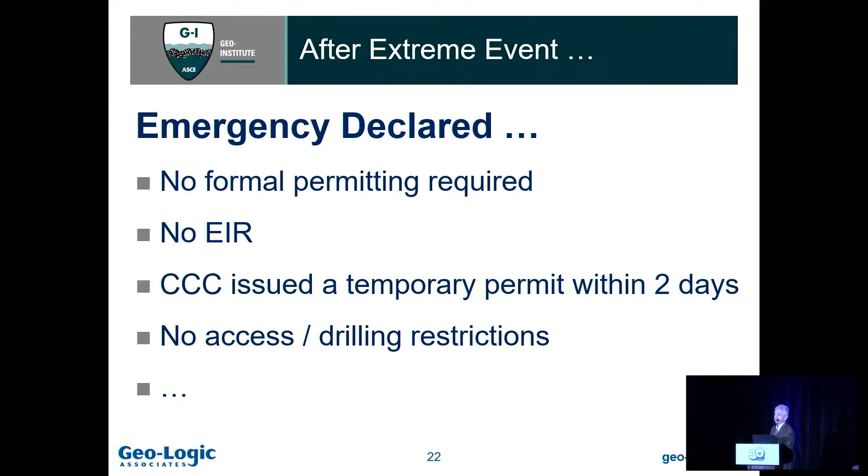What is that? Coastal Commission - so those of you who practice in Southern California, believe it or not, permit within 2 days, temporary permit. Suddenly, no access to drilling or drilling restrictions, and so on and so on. So, our favorite rocket scientists would nowadays say, one good extreme event is worth 5 years of permitting, at least in the state of California.

It doesn't mean it's not moving. For example, here it means there are no benchmarks, no survey. But we had LiDAR. We attempted in the past to use INSAR satellite data. It didn't work, 3-4 years ago.

Uplift, no doubt. I mean, we've seen at the field tour, you see shells just sitting on top of those rocks. They don't stick for long, for 200 years. So, they were there.

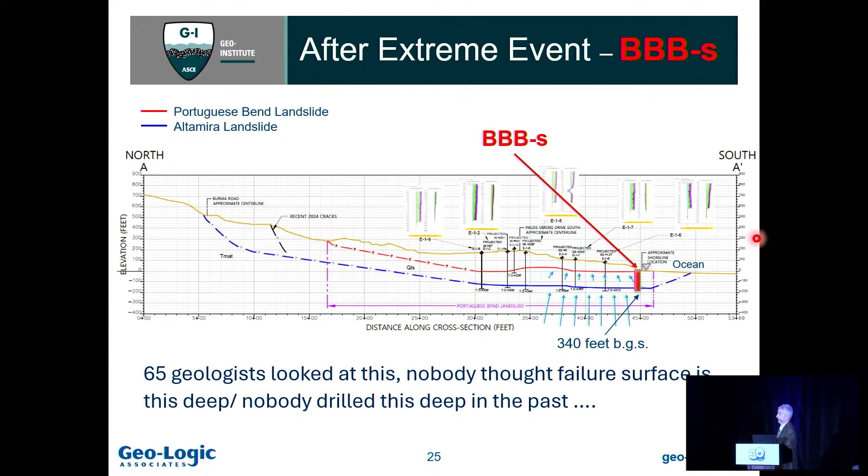This location and the solution, which is likely not permanent, was decided by a committee, so everybody got together, everybody involved, including the guy with the sign, and we concluded that to help those 400 residences mitigate this as much as we can in a short period of time, the best thing to do is drill BBBs. This was decided very fast.

So did they work? Well, peak movement was 1 foot a week. After 11 of them were installed, and now there are more, it's 1 to 3 inches a week. So it did do something. It did definitely confirm that artesian pressure is the main cause of movement.

Here are the locations. For those of you who attended the tour, we've seen this one, which is now the best visible. The others are covered just to protect the beach. Access from the beach club wasn't granted, so access was from someplace here.

Some of you asked me about the grading. So there's lots of grading just to create access so one can not only install but service and maintain those boreholes. Some had to be re-drilled.

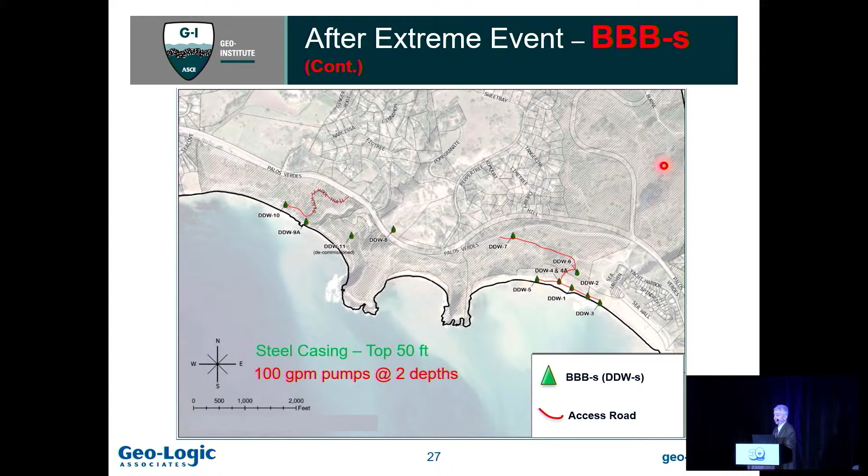But that is the situation, and you can see this from high-resolution drone photography. So you can see some boreholes are here because of the access. This is along here, the beach.

The beach club is here. They have their own boreholes, deep boreholes to relieve artesian pressure. They did not believe in artesian pressure for a long time, but now they do.

A little bit to zoom in. Now you can see here this beach extension due to landsliding along the deep failure surface. You can also see beach uplift, now there's a little bit more.

This is what comes out from the sonic borehole. So basically material comes in plastic bags and then geologists come and open it and inspect and log it, so information is recorded. This is how these big, beautiful boreholes look at the ground surface.

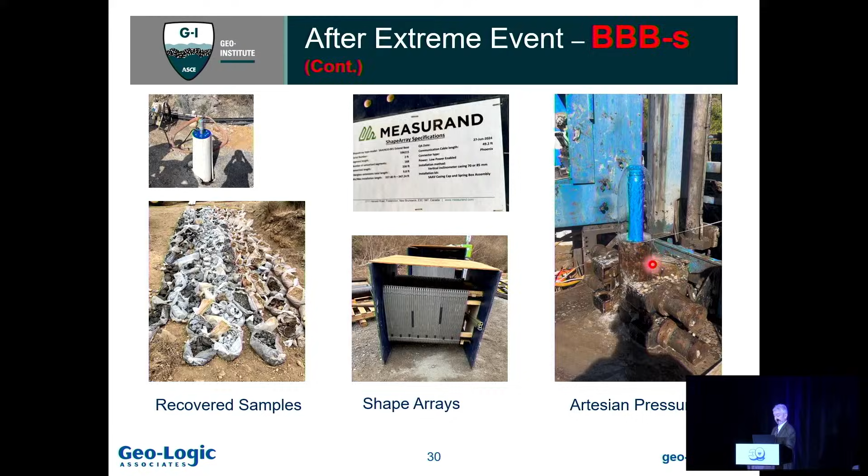And with that, I do have a few conclusions, takeaways, and acknowledgements. So I think that nowadays nobody doubts that artesian pressure is the predominant cause of landsliding, at least within the city of Rancho Palos Verdes. This disruption, coming and telling people that what they have been doing for 50, 60, or 70 years might not be quite beneficial, is sometimes needed.

There are a few things I learned in this project. One is that even though I commented in the report that more data is needed, that may be true because nobody knew. The geologic associate didn't know there was a failure surface 340 feet deep.

If you find a failure in shallow depth, why would you drill deeper? So people didn't. I think one good test is worth 1,000 expert opinions - that holds. One extreme event is worth 5 years of permitting - that also holds. I'm not sure how much one good numerical model is worth nowadays, probably many expert opinions.

And I don't think the story is done - I may see you at Geo-Extreme 2035.

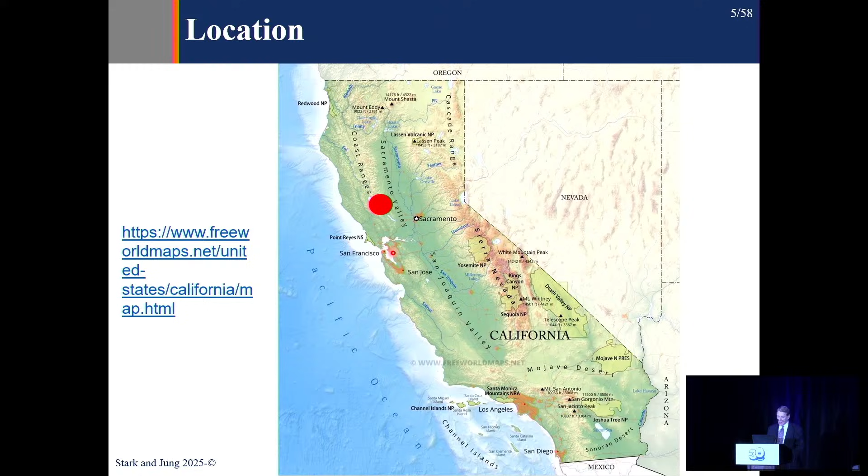So I have a quiz question for you right here, so don't fall asleep. What's the Cache Creek landslide? It's located in Lake County, north of Sacramento, about an hour and a half out of Sacramento. San Francisco is right here, and we're going to end up right about there.

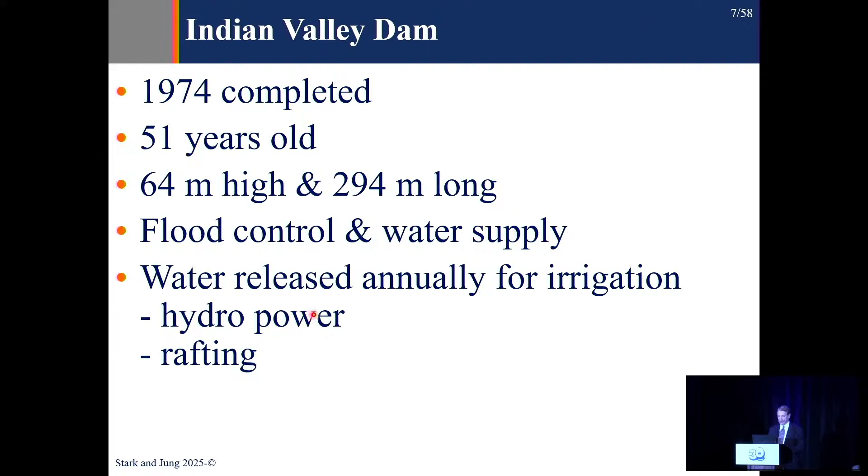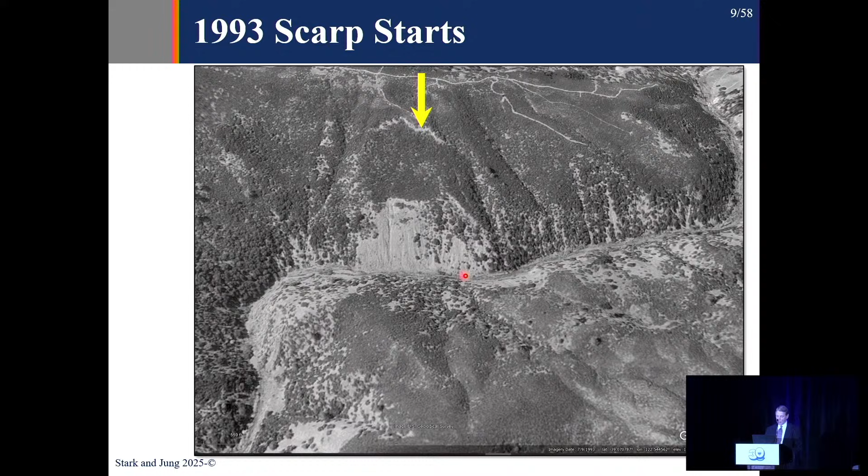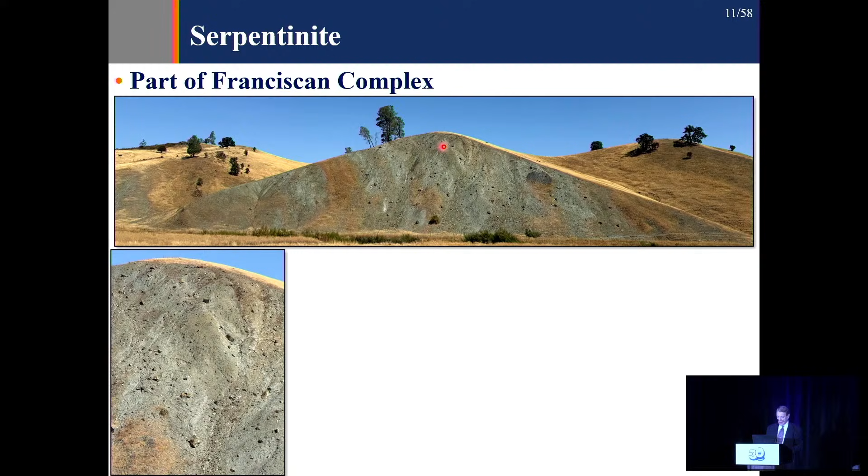This slide is what you'd refer to as a serpentinite slide - it's a block and matrix material in Northern California with a very plastic, high plasticity matrix. You can see it in a lot of road cuts in the area, for example this one - it's a greenish olive kind of colored material. And let's see, there it is.

If I zoom this up, you'll see some blocks here on the slope face—that's the block and matrix piece of it, and the clay or fine grain matrix is the greenish material. This is a deposit that has contributed significant slope stability problems in Northern California.

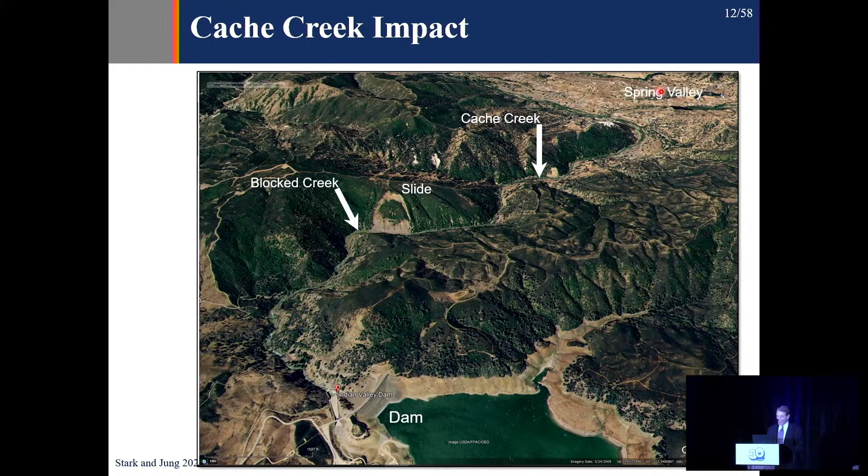So let's look at the water ponding in front of the slide, or upstream of it. Here's the slide, here's the creek—you can see it's wider upstream of the slide, and notice it narrows considerably right along the toe of the slide.

In fact, at this portion, you can see a little white water in the creek. Because it's narrowed so much, the velocity increases, and now we have some white water occurring. That's contributing to some erosion along the toe at different times, which I'll get to.

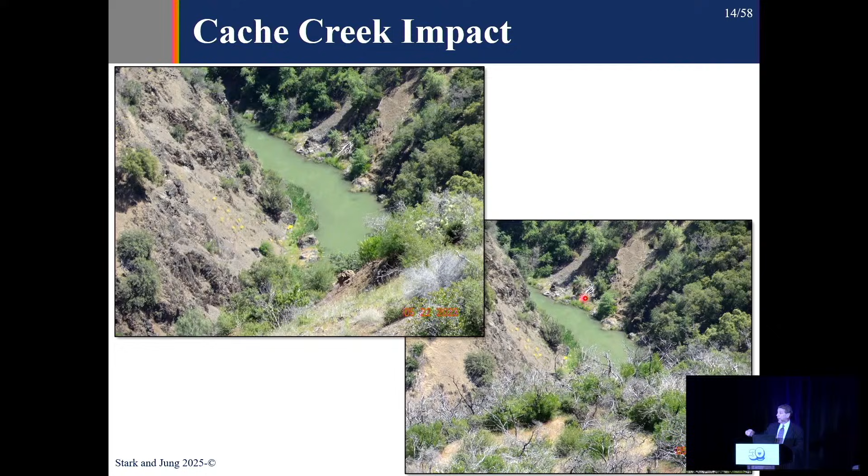Here are photos from the slide mass looking at the ponded creek. I mentioned the dam stores water for irrigation, so annually water is released from the reservoir, which all has to pass by the toe of this slide.

Okay, so we put some instrumentation in the slide—a weather station and some soil moisture gauges—to look at the effect of rainfall on soil moisture. The area had experienced a wildfire, so we were curious to see what effects that had as well.

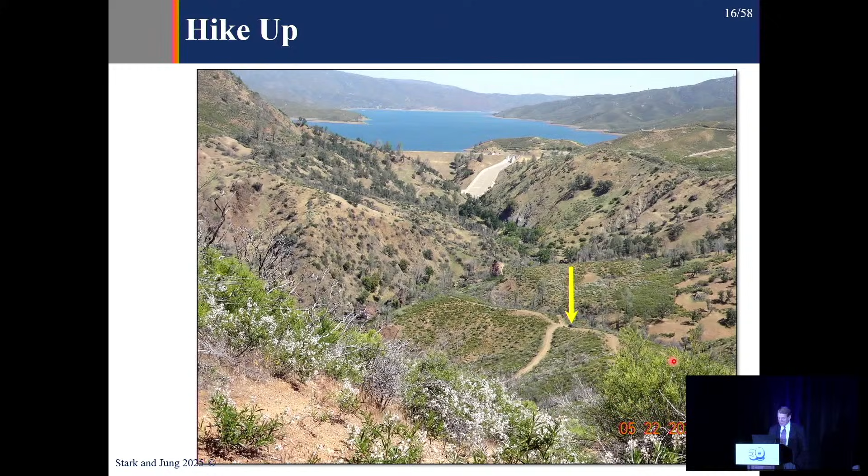And here's carrying in the weather station and all the soil moisture gauges. So it was a pretty rough go getting to the slide.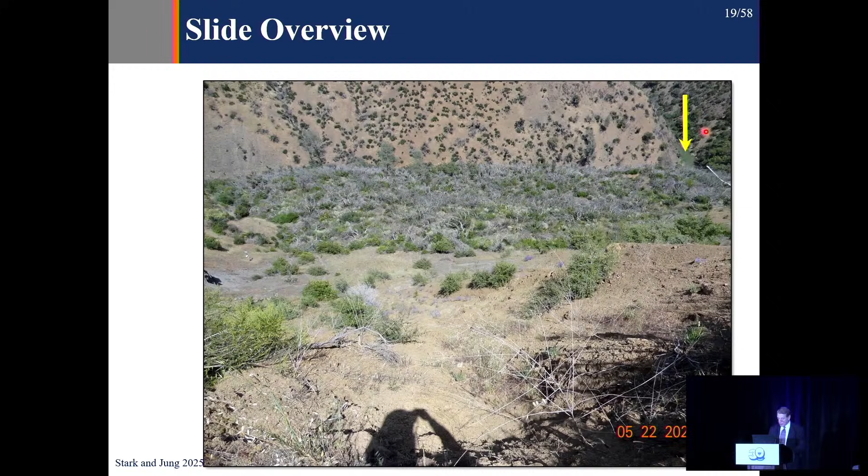After doing that, there's the ponded creek from the top. Upstream of it, there's installing the weather station, and it was interesting—there were fresh tension cracks in the slide mass, so it was moving at a slow rate, it looked like.

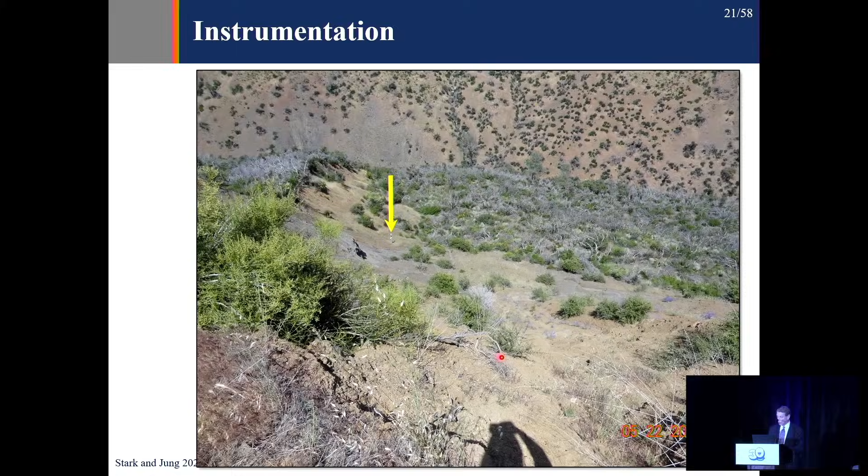After installing it and hiking back up to the top of the scarp, just to give you scale, that little arrow is pointing to the weather station, right there. You really probably can't see it in this room because it's so far away. Then hiking back out to the top of the ridge and down.

So what are the potential problems here? The first is a landslide dam. There's evidence that the slide has moved and pinched off the creek, which backs up the creek. Then if water's released from the reservoir, it has to go over that dam or erode it to get through and out through Spring Valley.

So in the United States, the last big landslide dam occurred in 1983 near Thistle, Utah—200 feet high, it blocked the Spanish Fork Canyon.

Here's the reservoir that built up behind the Thistle slide. It was so deep that it had to be released with a tunnel under the reservoir that tapped it and drained it out, because there was so much water ponded up it could not be allowed to break the landslide dam and release downstream. That tunnel, investigation, and construction cost about $200 million.

So that's what we're concerned about here: that this slide might pinch off Cache Creek, and then the dam wouldn't be able to release water annually. That would impact irrigation, but more importantly, it rains every year, the reservoir is drawn down through water releases, but then fills back up during the rainy season. So eventually that water is going to have to pass, even if it's not released.

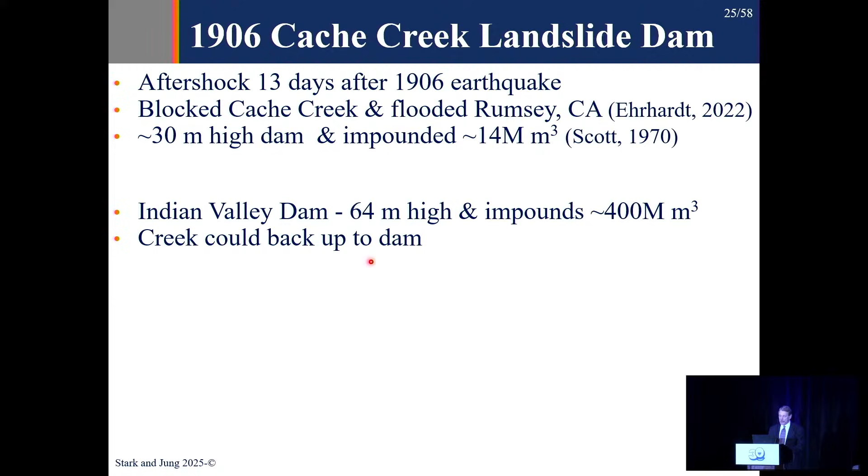We conducted an inverse analysis of the Cache Creek slide, varying the shear strength of the serpentinite to a factor of safety of 1. The inverse analysis showed a friction angle of about 10 to 11 degrees. Given the movement that's happened since 1993, this is a residual strength because of the prior movement.

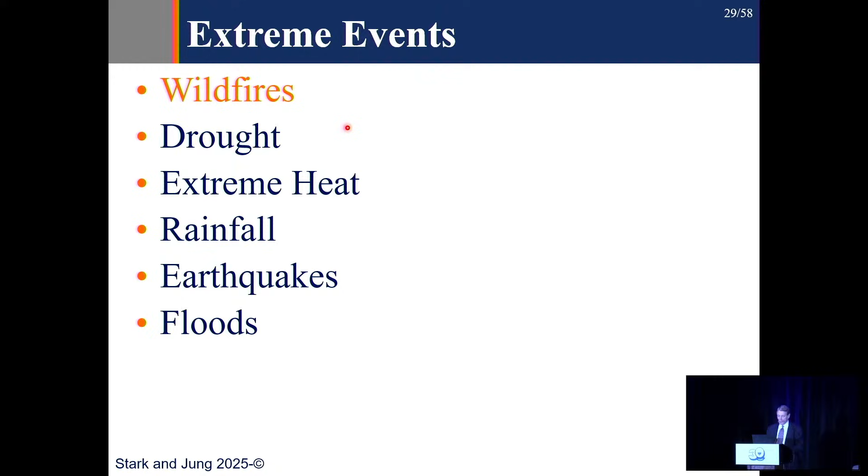So let me turn to extreme events. Here are the extreme events we're considering for this site: there are six of them - wildfires, drought, extreme heat, rainfall, earthquakes, and the flood I was mentioning.

The area has experienced wildfires. Here's a map of the area, and since 2015 - the dam, or the slide, is right there at the blue area. The 2018 Pawnee wildfire actually burned the slide area. In 2015 there were 3 fires, 2016 one, 2017 one, 2018 two, and so on. One of the 2018 fires actually burned the slide mass, which is why we were curious about installing soil moisture gauges there.

So let's look at the drought, heat, and rainfall over time. This is a plot of the Palmer Drought Severity Index, or PDSI. If this index is less than -4, we're in a drought; if it's +4 or greater, we're in a wet period. That's this blue line going across here, and if I put 0, that red line is 0, so we're in a dry period below this line, and drought is down here at -4. So there are a couple points to look at - here's the Pawnee fire.

In 2018, notice the PDSI is -1.2, so that makes sense, a dry period. Then later, about 2020 or 2021, look at the index, it's now as low as -5.6, so a drought period, and again another fire. And if we go back to 2015, where we had 3 fires, notice -3.6. So pretty good correlation between the PDSI and wildfires. I'm going to come back to this graph and correlate it to movement of the slide.

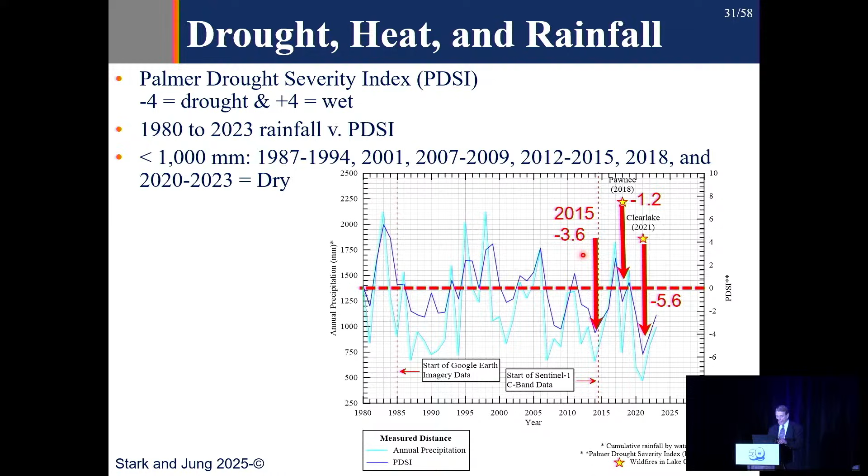Just wanted to introduce it here. This is data from 1980 to 2023.

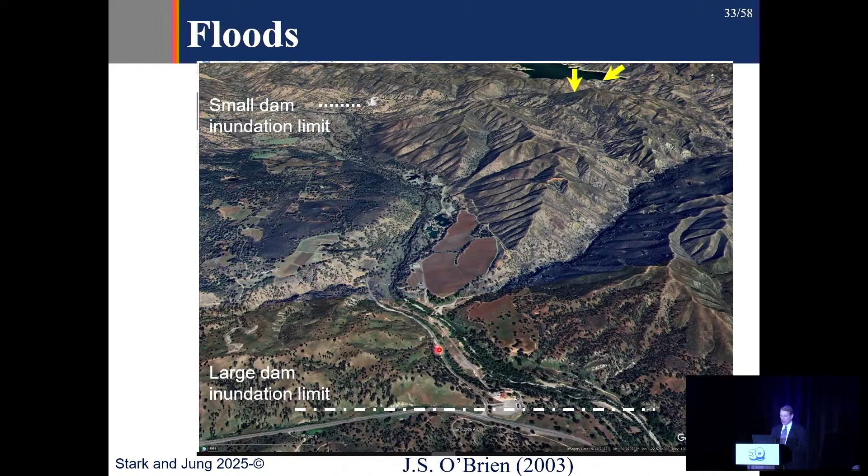Now let's talk about floods and this dam breach analysis. Remember, I had 2 heights of landslide dam, a short 30 meters and then a higher one. So there's the dam, here's the landslide. If the small dam is breached by ponded water, the inundation zone would go to about right there. And if a large landslide dam is created and is breached, it would come down to this area, and Spring Valley starts right about here. So Spring Valley would be inundated by the large landslide dam breaching.

The dam breach analysis: with the small dam, it would have a flood of about 2 to 4 meters deep and have a velocity of about 1 to 2 meters per second. The large dam would have a depth of about 7 to 11 meters and a velocity of about 3 to 4 meters. So those are the extreme events that are possible.

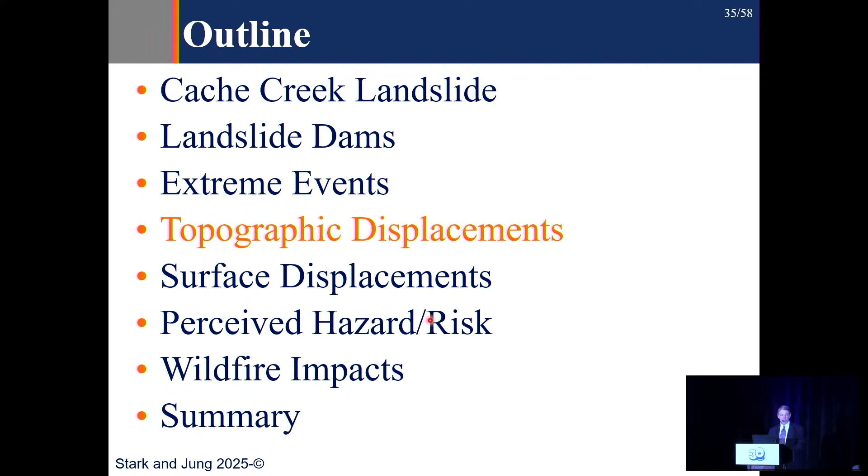So what's happening with the slide currently? First I'll look at topographic displacements, then I'll look at some INSAR results and surface displacements. Then I'm going to ask you about the perceived hazard and risk. So topographic, we use LIDAR...

DEMs and other DEMs, 1953, 2016, and 2021, and cut two cross-sections through the slide, number 1 and number 2. I'm going to show you the change in the DEMs over this time for each of these cross-sections.

Cross-section number 1 is shown here. It moved about 10 meters between 1953 and 2016. Between 2016 and 2021, not much movement, and that's because you can see there's not much difference between the red and blue line right here. 1953 is this black line right here. So notice here's the formation of the scarp between 1953 and 2016, and then down here at the toe, some increase in height due to toe bulging and moving into the creek.

Obviously this bulge here is much smaller than the scarp, and that's because there's been erosion of some of that slide mass by the creek over the years, and that's why you're not seeing a similar height at the toe as you do in the scarp along cross-section number 1.

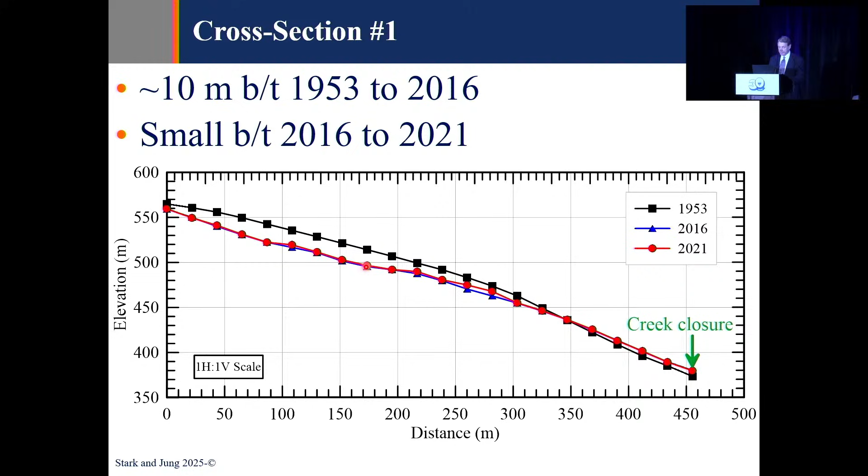On cross-section number 1, here's the scarp again, and now you can see the bulge at the toe pretty well here. Even with some toe erosion over the years, there's still a big increase in height along the toe from 1953, which is the black line right there, to 2016 and 2021. So there's the scarp and there's the toe bulge.

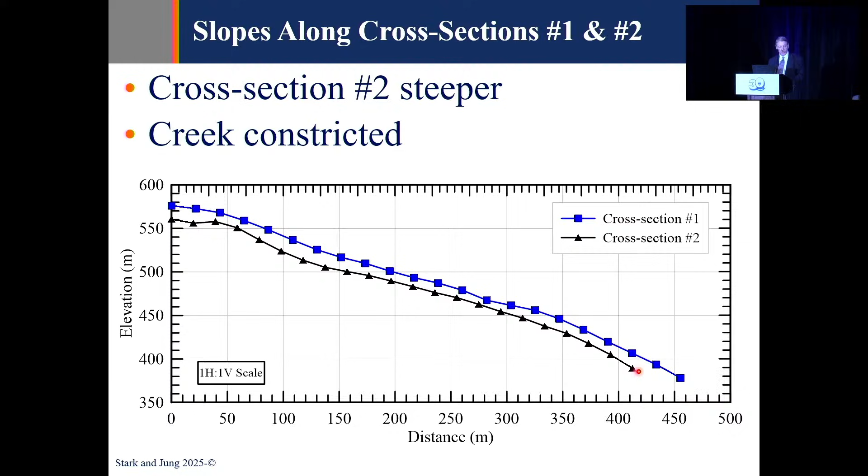Now we can compare the slope or slope geometry between cross-section 1 and 2, shown here. Cross-section number 1 is blue - let's see, I think I got those labeled wrong. Blue is number 1, and this is number 2. So a little steeper along the blue, a little steeper at the toe there, but pretty similar slope geometry across the slide mass. Okay, so let me turn to surface displacements.

We performed this analysis using C-band imagery. Every 12 days we were able to get an image. There's some details on our coherence and so on. Here's the plot of movement versus time of those monitoring locations 2, 3, 4, and 5 between 2014 and 2023. You can see a general trend of movement with time over about 9 years. So we tried to correlate that movement to creek flow.

On the bottom of the graph, these gold dots represent creek flow, picked up by a USGS gauge just downstream of the slide, so it's a good estimate of creek flow for Cache Creek. If we look here, there's an increase in creek flow, and notice a little increase in movement there, and maybe similarly here, a delayed effect, but possibly correlating creek flow to movement of the slide mass.

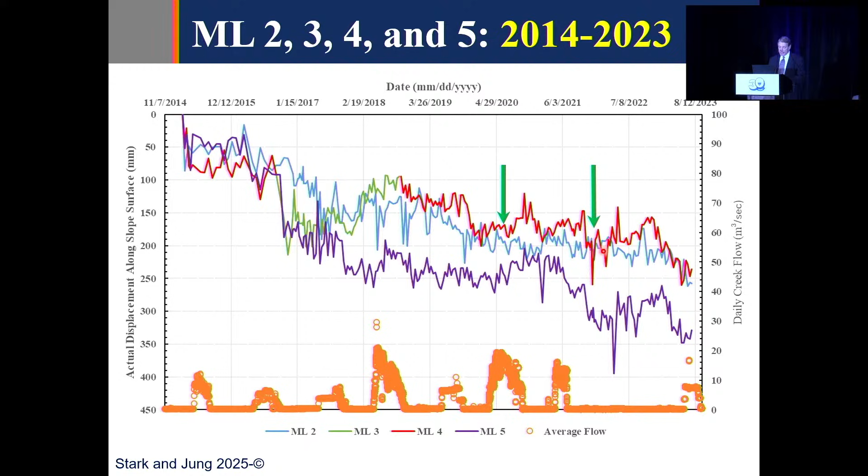Let me go back to the PDSI graph I showed you earlier. Remember, 0 and -4 is drought. Notice there's a wet period right there, a fairly high positive value of PDSI, so a lot of moisture. This green line is the average trend line for monitoring locations 2, 3, 4, and 5. Here's the wet period, and shortly after, there's a delay, then we start picking up a significant increase in movement. Interesting because after the wet period there's actually a dry period, but the slide still moves. I think Neven was hitting on that in his presentation, that you have a source area, it takes time for that source to make it down into the failure surface and out to the toe, and then you see movement.

I think we're seeing that with the Cache Creek slide. The other thing to notice on this diagram are these little vectors of velocity. Notice the wet period, and now the velocities are picking up as well, even though there's a little drought period in between. Using this data, we came up with the estimate that if rainfall exceeds about 1,700 millimeters, which is about 67 inches of rainfall during the rainy period, you have a potential for slide movement. That's sort of a guide for when people should start thinking about the slide moving more. That horizontal line going across is at 1,700.

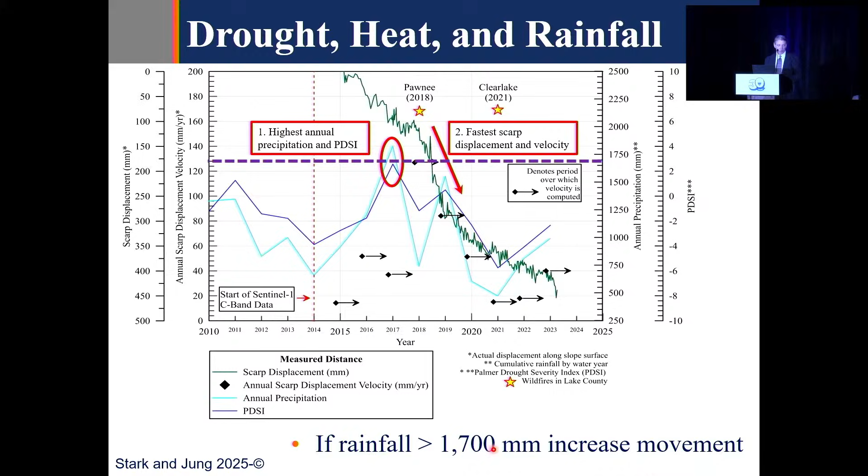So that brings me to the question, or quiz. I tried to present that in an objective manner, just the facts. This is a geo-engineering conference, so how many people would be concerned about the Cache Creek landslide, just out of curiosity? Few people. Okay, all right, good. And I realize this is a geo event.

As part of this project, we had a wide-ranging survey of residents, and we asked a number of questions, one of which was what hazards were they most concerned about. Any guess? You think it's landslides? Okay, so here's the summary: 813 people surveyed, and notice the hazards at the bottom: drought, extreme heat, wildfires, landslides, excessive rainfall, flooding, snowstorms.

I think I heard somebody say wildfires. Absolutely, that's an annual event, and you could see just in recent years almost every year there's a major wildfire, sometimes many in a single year. The other extreme event they were really concerned about is extreme heat, which tops wildfires just by a little bit.

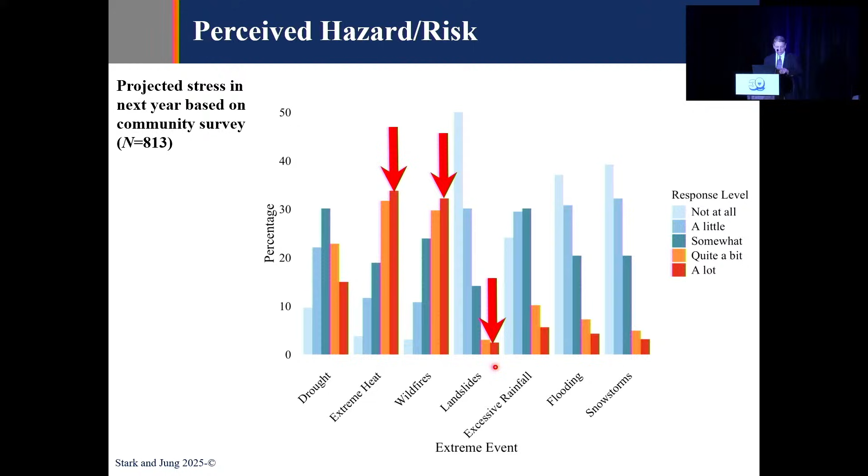So something to think about for our profession: how do we communicate these hazards better and more efficiently to the community? In summary, this is a multi-hazard project and situation: we've got a landslide dam, wildfires, rainfall, earthquakes, flood. Using digital elevation models and INSAR, we're able to get an idea of how much it has moved and how much it is moving, showing about 10 to 15 meters of movement since 1953. If rainfall exceeds this 1,700 millimeter threshold, we think the movements will increase, and that's a good magnitude of rainfall for emergency responders to know about. Finally, the risks are not being recognized.

So with that, I hope we got a couple minutes for questions. We're a little bit over time. We could use the break as a form of questions.